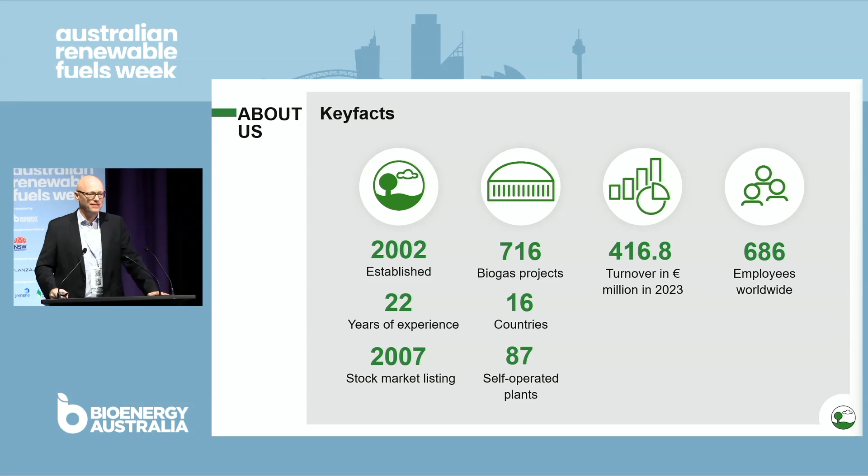We do EPC for biogas plants, for gas upgrading systems, as well as own and operate our own plants. As you can see, we've built about 700 plus biogas plants worldwide, of which we operate roughly 90 ourselves, mostly in Germany and Italy. And besides me, there is another 685 people working for EnviTec worldwide.

I first want to share a little bit, 3 examples of plants that we have built in Europe, just to give you an idea what's going on elsewhere, in case you don't already know. So this, for example, is a waste processing biogas plant, so actual organic residues from industrial sources in France, generating biomethane. For all of these plants, we have YouTube walkthroughs.

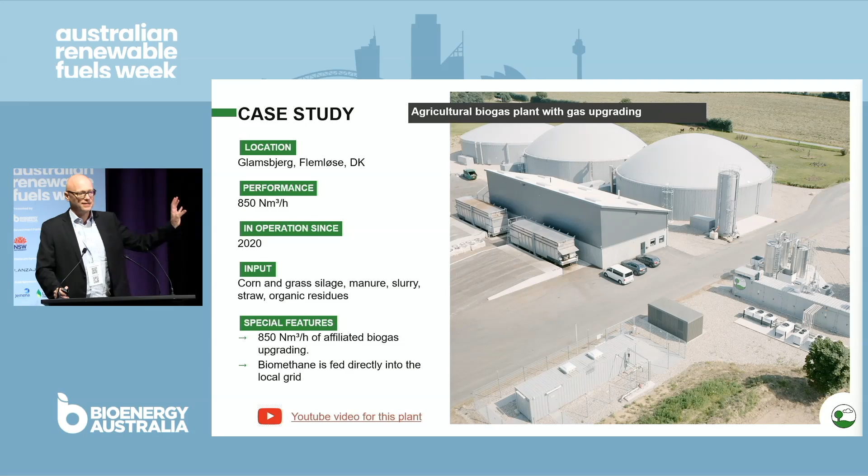Another one is an agricultural biogas plant, so that means we are using manure. I believe also some energy crop, probably grass silage, but mostly it's organic residues and manure processed in this plant, also feeding biomethane to the Danish grid.

And then we have our largest plant, which is in northeast Germany, generating about 25 tons of bio-LNG per day. So that is on-site liquefaction, not grid injection and then liquefaction elsewhere. We also liquefy the carbon dioxide coming from the separation on that site. And we generate the power required to operate the whole thing also from biogas on that site.

So obviously that's a pretty large biogas plant, but also it shows what scale is possible and happening elsewhere in the world. That LNG, by the way, is used as a long-distance trucking fuel in about 20 LNG filling stations that we also operate in Germany and France. So we control the whole supply chain from the biogas generation all the way to LNG distribution in this case.

In fact, also most of the input material in that case is chicken manure. Our major shareholder is Europe's largest egg producer, so even that is in-house, if you like.

Now, how to upscale biogas and biomethane. Like you said, the topic was for global demand, but it doesn't really matter to us where the gas is ultimately used. I think I discussed it a couple of times talking to policymakers. Yes, of course, everybody would appreciate domestic offtake.

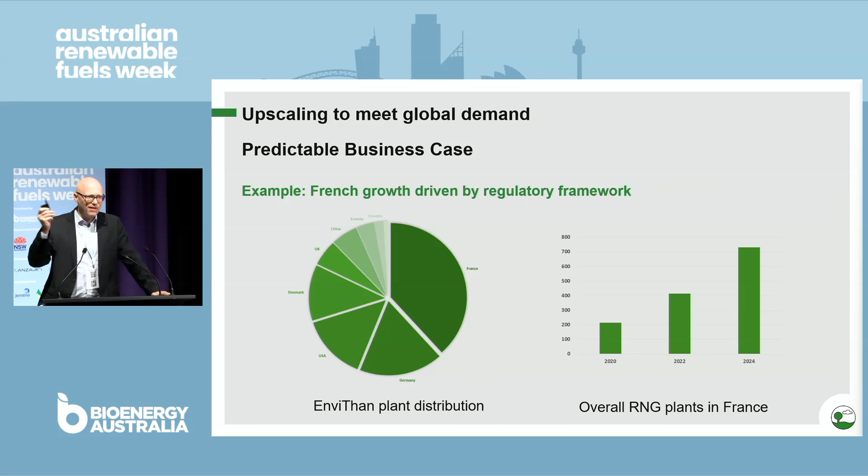And you can see on the right side the overall growth in the French market over the last 4 years, 2020 until 2024. You can see a steep curve. Now we are last year at about 700 plants. That's not us, that's overall market. And I heard 1,200 under development, somebody mentioned earlier. Why is that?

Well, there is a feed-in tariff for renewable biogas in France. The price is 30 euros. Well, I thought I'd come to an MMBTU country. I'm not, and I'm glad to hear that you actually use gigajoule, much appreciated, but that's about the same. 1 MMBTU is, I think, about 5% different from a gigajoule. So it's about 30 euros, not Australian dollars, per gigajoule in France. It doesn't have to be that much, but obviously the better the price, the faster the development.

Second, we get long-term contracts. So it's not a spot market where we have uncertainty about prices in the near or long future. There are clear national targets. In the case of France, it's 10% of renewable gas until 2030. So those are targets that are actually followed up on.

So it's not, as on the first day, I think there was talk about how we have targets for 2050, but not for next year. And that's always somebody else's problem if we talk about 2050. And simplified procedures, that was also raised. A predictable business case during the development phase and regarding the income, that's key. Like I say, it doesn't have to be 30 euros per gigajoule, but that's obviously nice and proven to help.

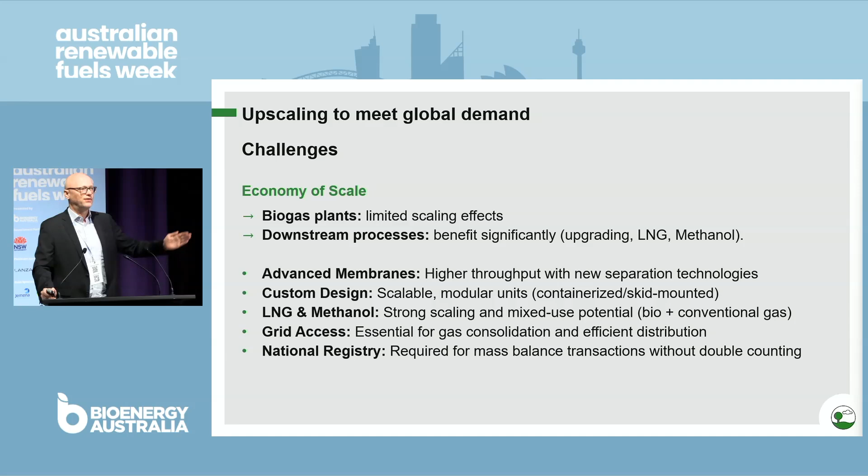So that's very encouraging and necessary for transporting or virtually transporting renewable properties of gas from one location to the other through the grid, or even from one grid section to a disconnected other grid section within the same country.

Here are two examples for economy of scale. I already showed you the bio-LNG and liquid CO2 plant that we have in northeast Germany. Another example is evolving in Malaysia right now. I'm mentioning it because it has been on the news. So a developer is planning a bio-LNG bunkering hub near Singapore, and that will be supplied by national gas pipeline throughout Peninsular Malaysia to provide renewable bunker LNG.

So that means not export LNG, but actual fuel LNG for ocean-going shipping. Mostly driven again by European regulations where we have emission targets on shipping that is going to or from the European Union. By the way, with a carbon price of about 100 euros per ton.

Now, gas market access. After upgrading the gas, we can transport it by truck using CNG, but that is only for a limited distance because of the relatively low energy density of bio-CNG, so at about 250 bar. Let's say until maybe 50, 100 kilometers, we can talk about that. But beyond that, we need other means. Grid access, already evolving in Australia.

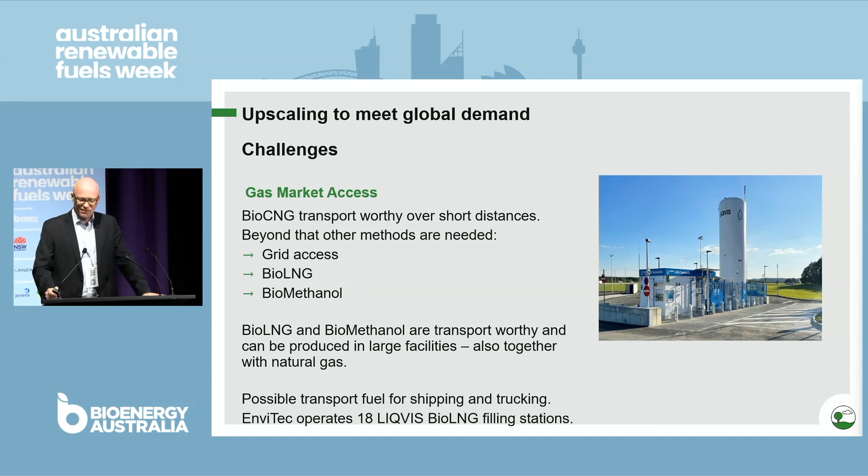Now about the diversified revenue streams. Of course, we have the biomethane, but beside that, every biogas upgrading plant is also producing almost an equivalent volume of CO2 at a very high purity. Somebody mentioned it's the cheapest way to capture CO2. I'm not an expert on that, but basically it should be true because the CO2 coming from our plants right now is free.

Most CO2 is actually vented, which is okay because it's carbon neutral CO2, so it's organic CO2 as well. But obviously it would be much better to use it and either produce carbon negative biomethane or abate CO2 in other fossil utilizations.

In the plant in Güstrow, that bio-LNG plant, for example, we produce food-grade liquid CO2, which is going to the beverage market. It could be used for power-to-X projects as a carbon source. It's basically freely available, highly concentrated, I think by default about 95+% CO2. Of course, that could be improved if needed, to whoever has a good case.

And it drives me nuts, frankly, when I see direct air capture CO2 projects. I wonder who is paying for that if nobody is even willing to take the CO2 we already have at a high quality at every biogas plant.

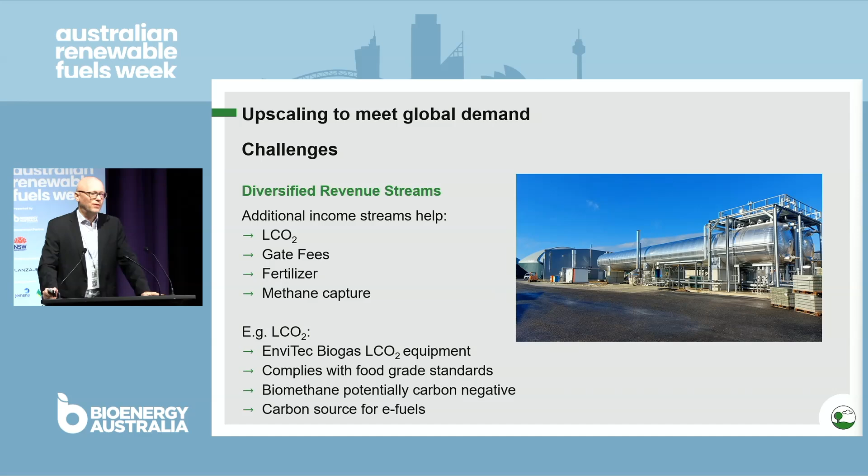Now, what can EnviTec contribute to accelerating the development here? So, of course, we have 20+ years of experience. We have built 700 plants. We are operating 90 biogas plants. And, of course, we are happy to share the experience that we have gathered there with anybody wanting to work with us on project development, on feasibility studies, and so on.

And also that's why I'm here and going to a lot of other conferences in the southeastern part of this world. Then obviously we can provide our proven upgrading and digestion technology, as well as provide customized solutions, for example, for large-scale or also very small-scale projects, for on-farm fuel production projects. So all of these things can be custom designed, and we would be a partner with experience of large-scale deployment globally. So we have built plants large-scale in France, in the United States, in China, and of course everywhere in Europe.

Now, what got us interested here? And that would be that Australia at least is a developed industrial nation, not so much in the biogas space, but in general. And that's helpful for us because that means that expectations in the quality, the efficiency, and the safety features of the product are in line with what we would want to deploy. We do have decarbonization targets in Australia, so that's helpful.

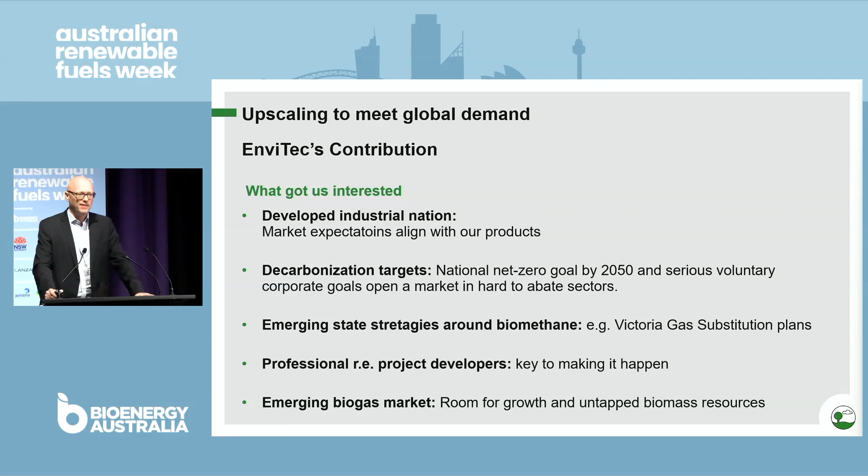We do see an emerging market here. So biogas obviously is not saturated. There's one biomethane plant in existence, so obviously there's a lot of space for new development, which we are happy to participate in. And we do see professional project development here. That's also not obvious and not the case in every market, and really key to fast deployment and development of the biogas industry here. Professional developers who know what they do, who know what the regulations are, and who can push for quick development. And that's perfectly on time.

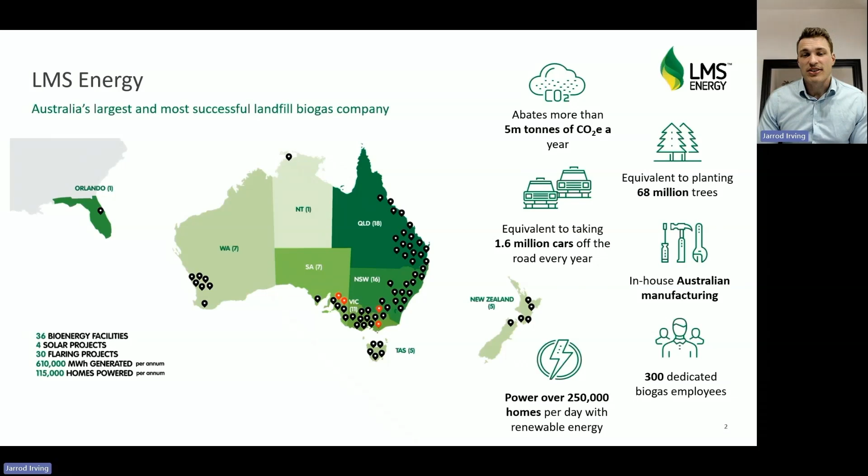We have over 36 bioenergy facilities across the country within Australia, New Zealand, and the US. We currently abate over 5 million tonnes of CO2 annually and power over 250,000 homes with renewable energy. And we see our role across the whole circular economy. So we produce electricity generation from landfill gas to electricity. We also flare. So all of our sites, we determine what's the best end use of our energy system, and some of that's putting it into the grid, some is for data centres, and others are just flaring because they just don't have enough gas.

So we also have Harman Energy, which is another arm of our business that also works with our agricultural partners in delivering solutions for different industries, meat processing, dairy, to really support behind-the-meter generation, but also working in sugarcane, looking at developing biogas to biomethane and other fuel sources. It's exciting to see where we're going as a business, and we see biomethane really playing a significant role to support our future work in this space as we continue to abate methane.

Now, I just want to give a bit of context on where the global market is. It is growing significantly at around 20% annually, with production reaching 9.5 billion cubic metres of biomethane. That is a significant volume of gas comparatively. It's over 370 petajoules. For perspective, we currently are producing 90 TJ, or 0.09 petajoules, thanks to the Malabar Biomethane Project. What I really want to know is how can we learn from international markets to fast-track our own industry?

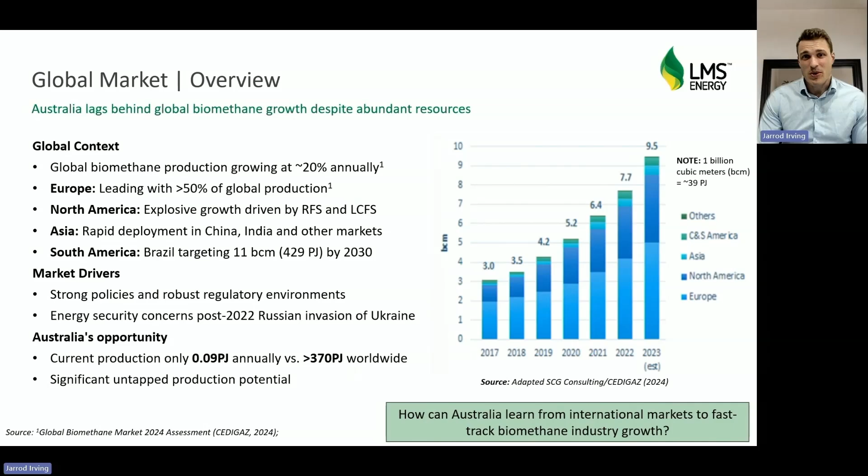This is a developed, entrenched industry worldwide. We need to be able to leverage that and maximise it to fast-track our developments. Now, I'm sure from today, and unfortunately I wasn't there, and yesterday, a lot of people are talking about what people internationally are doing.

And you have organisations like the European Biogas Association and the World Biogas Association that have really started to document best practice, as well as the Biomethane Industry Partnership, who've released fantastic information to help support the growth of the industry in those countries. And it's fantastic to see. And we can really work with those international partners, which we are at the moment, to fast-track our own sector. We don't want to make the same mistakes.

And what I've noticed in doing a project, in particular in the US, is there are hurdles. It is challenging, but the market in the US has created an opportunity. And although it is challenging at the moment from a political perspective, there are a lot of unknowns with the new government. Looking at the positives and how the US has sustained explosive growth, you're looking at the RFS, the Renewable Fuel Standard.

Now that provides, as of last week, around $28 US a gigajoule. Now you don't get that. Long-term offtakes are really important, and they're obviously not going to pay that amount. But those D3 RIN credits, which I'm sure James will speak on after me, are fantastic at supporting the project. So that market mechanism has been really important. You have the California Low Carbon Fuel Standard, providing an additional revenue stream if you go down that path for dairy in particular and other agricultural-based products.

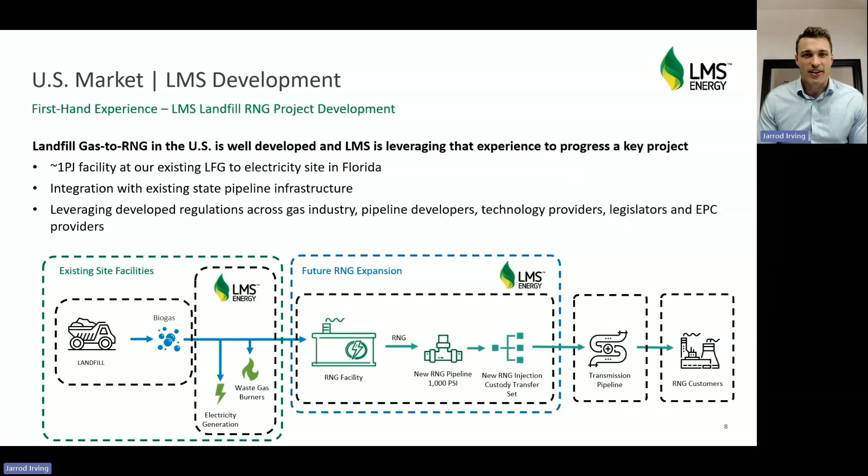We're talking to developers that have built 20 to 30 of these facilities. It is not new, and that's fantastic. It's really nice and refreshing. And I hope that one day we're in that same position, and hopefully not too far off. So there are some lessons learned as part of the work that we have been doing.

Commercially, long-term offtakes are so important. Being able to lower the risk profile with deals greater than 7 to 10 years is really important. It helps with financing. It helps provide confidence around where we're heading. You don't want to put investment into a project when you don't know where it will be in 10 years' time. Long-term offtakes provide surety to investors about the long-term profitability of those facilities.

Technically, the design is critical. Understanding your pre-treatment systems, your nitrogen removal units, your CO2 systems, how they integrate with each other and the different types of technology is really important, and also how well they're improving that existing technology. It's fantastic to see the development is only growing. Prioritising gas quality and facility uptime: the more you have the facility operating, the more biomethane or RNG you produce.

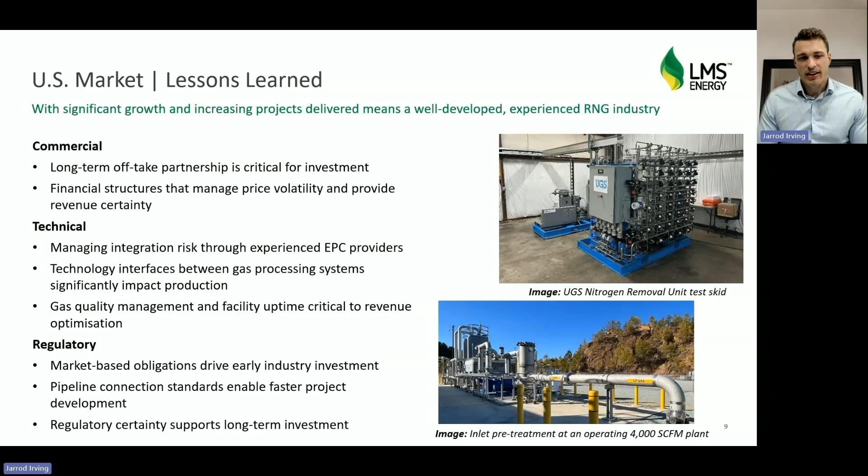Now, I'll just touch on Europe briefly. We have been doing a little bit of work in that sector and also have a few partners on a couple of projects.

But they've got such valuable information, and I find myself communicating with some of our European counterparts on just project experience and lessons learned. They've got over 50% of existing global biomethane production and have been doing that for the past almost 2 decades. And it's really led by France, Germany, Italy, Denmark, and the UK. But we're seeing significant growth continue across Europe, which is fantastic to see. And that's the key policy drivers around the ambitious RED II targets, feed-in tariffs, tax incentives, grid injection, price premiums.

Overall, the bioenergy industry, I've found internationally, is such a knowledge-sharing base. Everyone is so excited to get on the phone with you and have that conversation about how do you improve your facility, your anaerobic digestion process, which I think Europe do really, really well. And that's fantastic. And that's kind of one of those key lessons. So what we're seeing is, in particular for our ag projects, it's important to be able to gain that valuable experience on how do you manage those lessons learned.

So diversifying feedstocks and the importance. Scale matters. The larger the facilities, they do achieve better economics, but they also have their own challenges. Long-term offtake agreements with both feedstock and as well as your kind of offtake partners is really important. Also, potentially segregating your facility. So if you want to manage the feedstock as well as producing the biogas and potentially somebody else doing the upgrading process, kind of finding that balance, because there is a risk in each portion of that, and it's how you manage that.

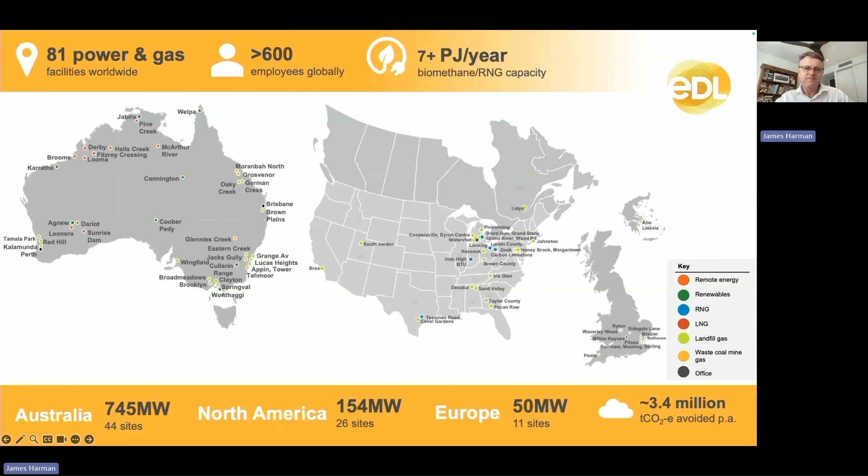In North America, we're now in the top 5 landfill gas to clean energy producers in the US. We have over 150 megawatts of renewable baseload power and produce about 15,000 MMBTU a day, or gigajoules a day, of renewable natural gas, which adds up to about 7 petajoules per year of renewable gas.

We entered the US in 1997 and Canada in the last few years, and through a series of acquisitions, we've established a base of 21 landfill gas to clean energy facilities, including 1 in Canada, and now 5 renewable gas plants, as you can see on the map here, spread across the US.

It started in 2020 in Indianapolis with our Indy High BTU RNG facility, and we've since worked with various waste companies to convert existing landfill gas sites to biomethane facilities, at Wood Road in Michigan, Tessman Road in Texas, and now 2 newer sites, and 2 of the largest renewable gas plants in the US, Limestone and Lorain, both in Ohio.

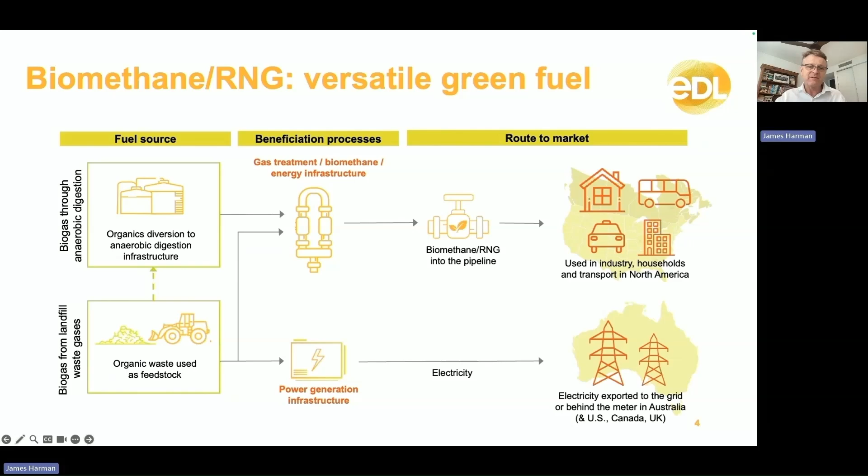A perfect example of how this works is in San Antonio, Texas, where biomethane produced at our Tessman facility fuels a fleet of 500 council buses for San Antonio Council, providing a great circular economy using waste gases to help fuel the council buses in San Antonio.

So how's this happened? It's happened on the back of supportive policies. It's an amazing achievement, largely due to market incentivisation through the right regulatory frameworks. These set clear long-term targets, provide flexible mechanisms so markets can grow without jeopardising supply or demand. And I'll start with the big one, the Renewable Fuel Standard, or the RFS, which is the basis for renewable identification numbers, or RINs. This is a marketplace where it's basically polluter pays.

Diesel refiners need to buy green credits to offset the carbon that comes from the diesel refining, and companies like EDL and others in our sector produce these RINs through producing renewable natural gas, and the polluter buys these green credits from us to offset their carbon emissions. And they purchase the RINs and then they retire them to meet their carbon reduction obligations.

And in terms of value, well, it costs a lot more to produce renewable gas than it does to produce natural gas. And so these credits need to have some material value to incentivise the production of green gas or renewable natural gas. But as an example, right now, the value of a RIN in the US is about $38 a gigajoule versus natural gas at about $2.50 a gigajoule. So that shows the differentiation in terms of the value of the product in the market.

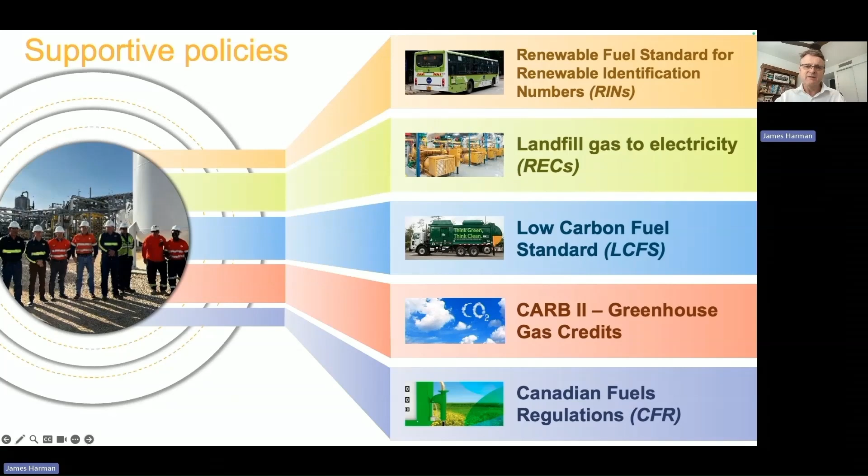One that's not on this page, but it really has been a game changer for renewable natural gas particularly, and has seen an incredible boom in the construction and operation of renewable gas plants across the US, is the Inflation Reduction Act introduced by the Biden administration. The Inflation Reduction Act has allowed developers of RNG plants in certain periods of time to claim income tax credits against the capital cost of developing these projects. And that's helped fuel the boom really in construction in recent years, and EDL has benefited to a small degree from that as well.

So current annual production of RNG is about 120 million MMBTU, or close to 120 million gigajoules, with demand just below that level. So, as I said, the renewable transport market is becoming saturated, but that's really led to the emergence of another market that's thriving right now, and that's the voluntary market, where large corporates want to purchase renewable gas for hard to electrify industrial processes, or for their own carbon footprint, for large corporates who consume gas even in heating buildings, heating offices, certainly key in industrial processes as well. These companies who want to offset their emissions have the option to voluntarily purchase renewable natural gas, and it can be certified as validly renewable.

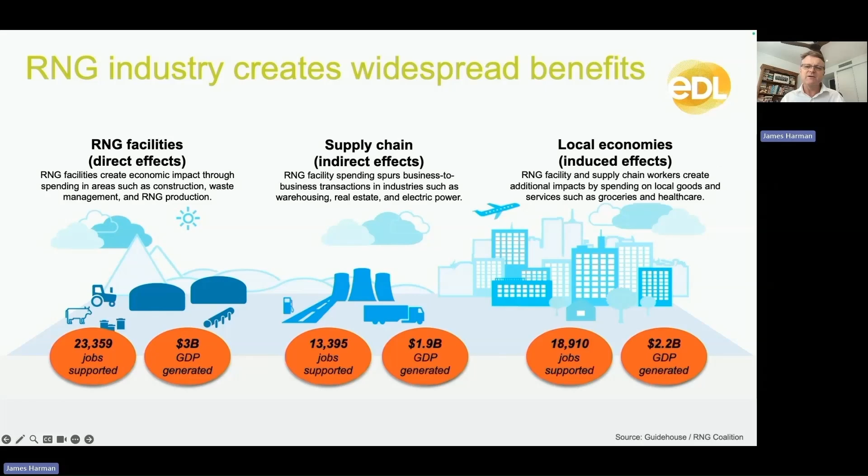So in conclusion, the US RNG biomethane industry has been a major success story, and there are so many lessons here for Australia that we can borrow from without having to reinvent the wheel. We have the feedstock, we have the demand. In fact, our domestic gas market's crying out for more supply. What we're missing is a supportive regulatory framework to underpin investment in renewable gas and market creation activities. At a minimum, we need a renewable gas target similar to the existing renewable energy target, the RET, that's been so successful in Australia, and the low carbon fuel standards in the US.

It'd be a great solid starting point where the polluter pays. A renewable gas target would work with fossil fuel gas companies needing to produce a certain fraction of their production as renewable gas, and if they're not able to produce it themselves, then they can buy credits from those who are able to produce it to offset some of the carbon of the fossil fuel gas that they produce.

I'm going to leave it there. There are so many lessons that could be learned, and I could talk about this for a long, long time, but this is a very short presentation. The key message, I guess, is that this industry will only thrive in Australia with supportive regulatory framework and policies. That's been seen in the US, it's been seen in Europe as well, where we operate.

But our experience in the US is that if you get the policies in place, you get the right framework in place, then the market will follow and can lead to a buoyant and thriving industry such as we participate in in the US. I look forward to continuing to support the development of that industry in Australia and hope to be able to come back and talk about the exciting projects that are being built in Australia to produce renewable gas to help decarbonise many sectors across Australia, including industry, transport and others.

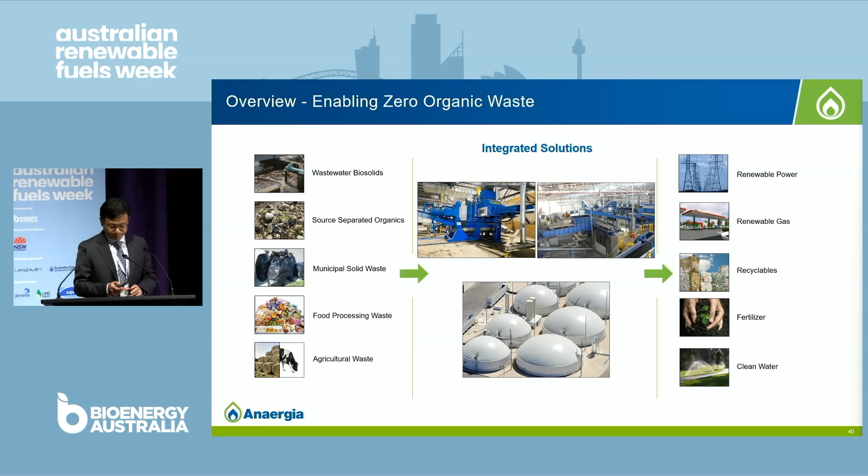As a group, with all the technologies we have, we start from the waste receiving, pre-treatment, very important, and go into anaerobic digestion and processing of the gas, either into power or into renewable gas. We also have a growth technology that handles the digestate treatment. Now overall as a group, we have completed more than 1,700 either plants or subsystems. So a lot of track records and knowledge and experience. We have global operations, so in Italy, UK, and Asia. I'm from Singapore. And we also have operations in USA and Canada.

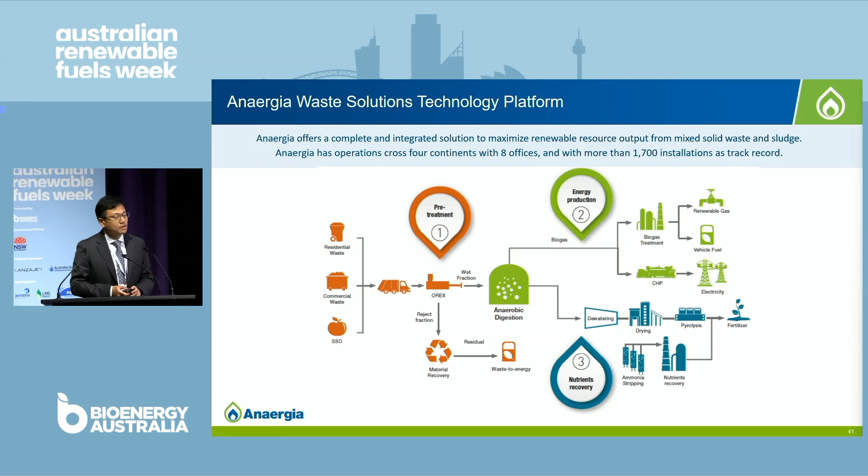Our fundamental business model, basically we supply the technology package to our customer. It will typically include the engineering design, process guarantee, and the key equipment we need for the project. Upon request, we also provide service on O&M, and on a case-by-case basis, we may own, invest, and operate a biogas asset. It could be greenfield or brownfield.

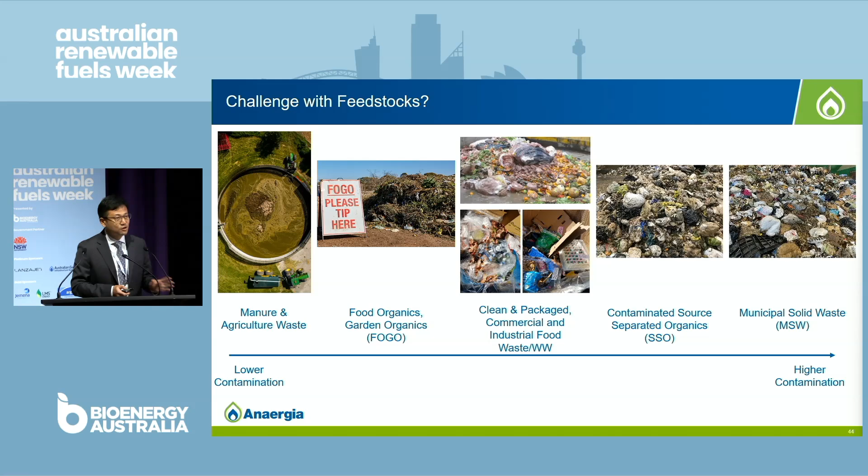Now, of the two solutions we have, the first one is about pretreatment, which is related to feedstock. I think this is very important. I think many people have emphasized it. For a biogas power plant, you can have many different types of possible feedstocks. It will range from very clean material to very challenging material such as MSW. If your plant is able to accept different kinds of waste and your pretreatment system is versatile enough to handle all of them, you will expand your feedstock supply base.

So in this case, we have this technology called organic extrusion press. It's a high-pressure extrusion-based technology. What it does is that it can accept what we call polluted waste, with a lot of contamination, even material like MSW. And after the process, we will have one wet fraction, and that's what we are targeting. That's the material for the AD plant. And the reject fraction, which is the dry fraction. Now, one additional piece of information for the Australian market is FOGO. This equipment is also suitable for processing FOGO.

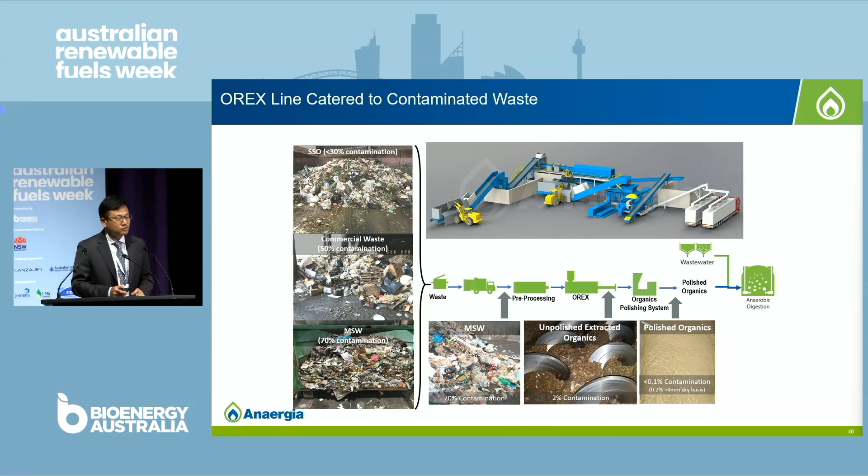So you accept the waste in your AD plant and you treat it. This technology also enables another possibility, that you set up an off-site organic recovery facility. You accept the waste locally, you recover the organics, and you bring the organic material to a centralized AD plant. So we have additional feedstock on top of the waste that you're receiving in your AD plant. You also achieve another objective by doing so, that you divert the organics from landfill. So if you have a landfill tax or you want to reduce emissions from landfill, this is another additional benefit.

Just on the FOGO topic, on the left-hand side, the picture is about the mixture of food waste and the garden waste. After the OREX processing, what you get: in the center is the organic fraction, and the dry fraction on the right-hand side.

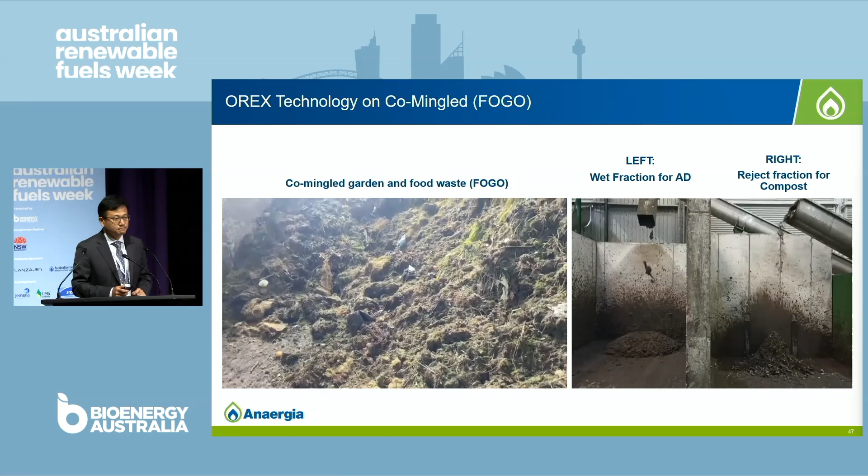Now, if we talk about the quality of biofertilizer, then we need to control the quality of the organic in the digester. We have this technology called polishing system. This step removes all the small flakes of plastics. Another step removes all the grit and sands, including glass particles, from the organic.

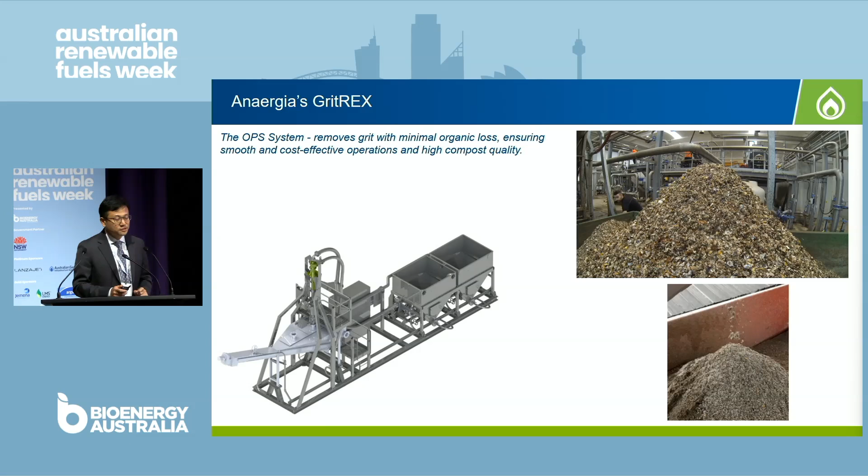So after this two-step polishing, you will get a very good organic fraction into the digester, guarantee smooth operation of your digester, and you will get a very good quality of organic cake out of the digester for further use as fertilizer. So this first solution makes more feedstock available for the AD plant.

Second solution: how can we make more biogas out of the existing digester? A solution we call Omnivore. It's enabled by using a high solid content digestion technology. Just a simple chart, I use a wastewater treatment plant digester as an example.

When you increase the solid content of your digester, the same digester will be able to take in more waste and generate more biogas. And that allows you to take in additional organic waste from, for example, the off-site organic recovery facility I showed just now.

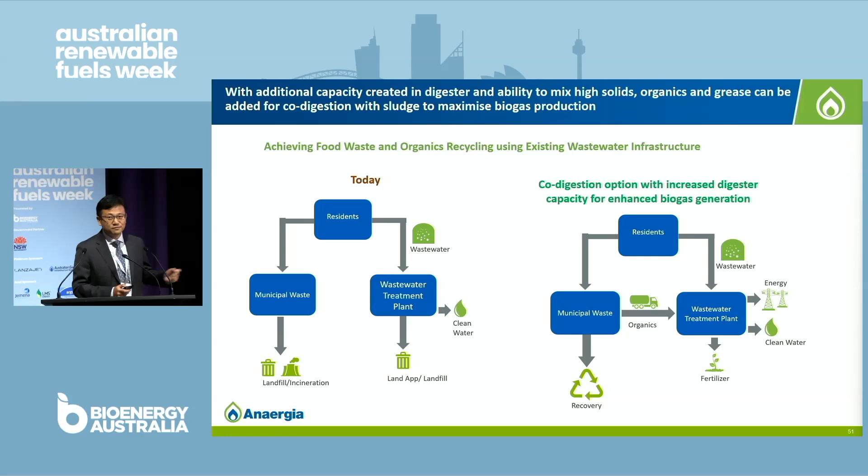A lot of benefits of doing so: additional capacity out of your existing plant, and you don't build additional digesters, so lower capex; less volume of material to handle, to mix, to pump, to heat, so operation costs will be lower. Additional income for waste coming into your facility, gate fee, more power, more biogas.

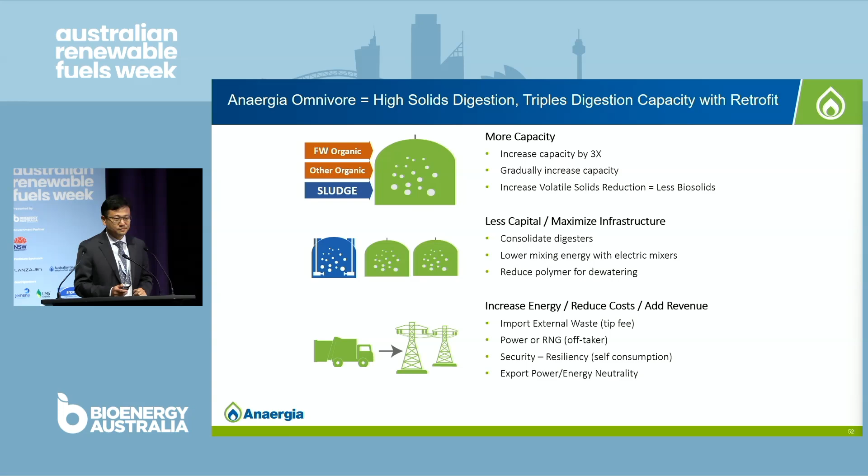There's a group of technologies that enable this solution, and one of the key technologies is this mixing technology called a PSM mixer. It's a submersible mixer and slow speed, so it has very high torque, and it can handle material with very high solid content, viscous material. It's installed on a guide pole, so we can adjust the height of the mixer at different stages of operation. It also comes with a service box on the top.

What it allows you to do is to carry out all the maintenance and repair work of the mixer while your digester is still operating, generating biogas continuously. It's a very energy efficient mixing technology also.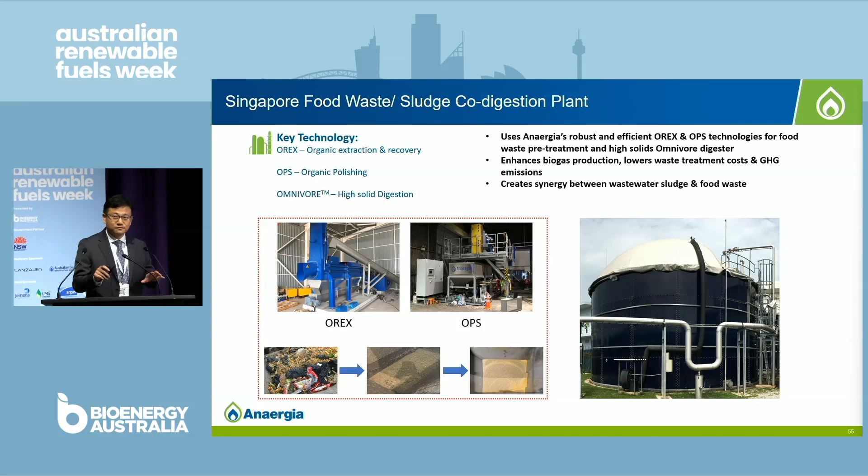Now I just want to show some interesting case study pictures. This is a plant we have in Singapore that has installation of the OREX and the polishing system, and also co-digestion, with the best and maximum biogas generation. Actually, co-digestion also benefits economically in terms of the material that you use.

This is another plant we did in Italy. You can see the 4 digesters there. We did a retrofitting for one of the digesters. Now this digester is able to handle the material that used to be handled by 3 of the digesters. So you can see the other 2 digesters right now are empty. And the benefit for the owner is lower capex cost and lower operation cost.

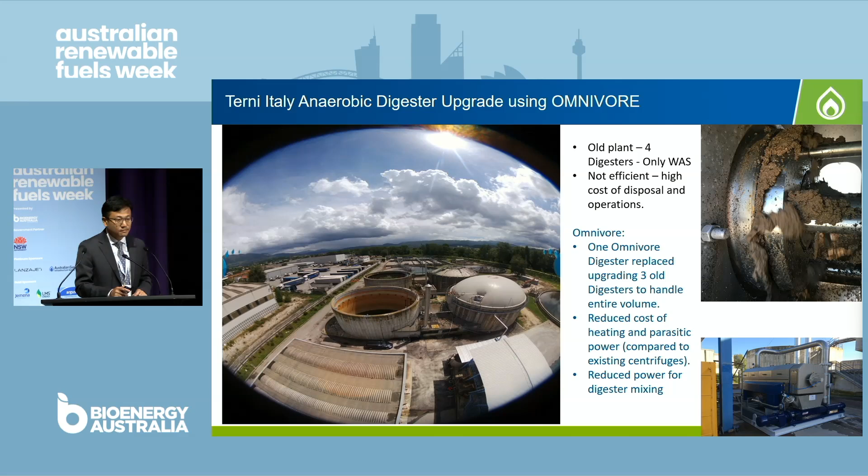There's another project reference we have, but I want to show this one. It's interesting. This is a SoCal biomethane plant that we own and operate. What you can see here is that at the center, there are 2 existing digesters. We did the retrofitting and technology upgrading. And now, the facility is allowed to take in additional organic waste from external sources.

So we can see the facility at number 1. That's the one we installed for taking additional organic by truck. We also installed the biogas upgrading system that's on the right-hand side. So this is able to produce about 320,000 MMBTU per year.

I don't have a picture here, but by doing all this off-site organic recovery and centralized AD, we are also operating one of the biggest biomethane facilities in California and the USA. It takes about 700 tons per day of organic material and produces 1 million MMBTU per year.

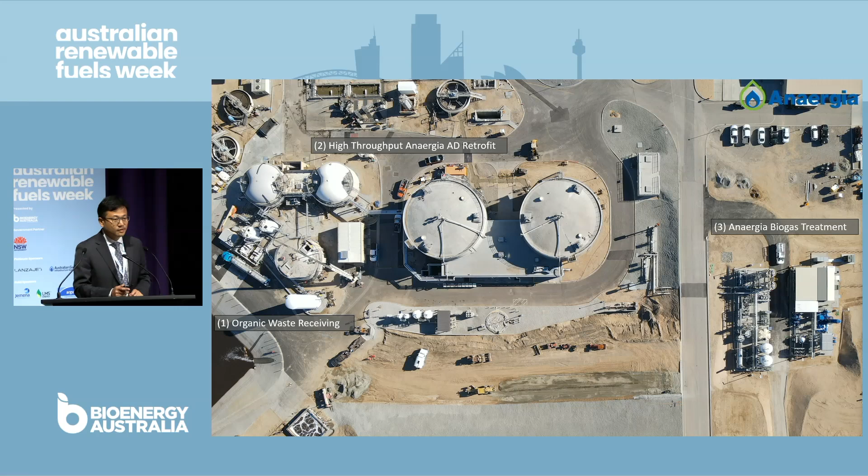Yep, so 2 solutions. One is to maximize the feedstock, and second is to maximize the production capacity of the existing digester. That's the key message for me today.

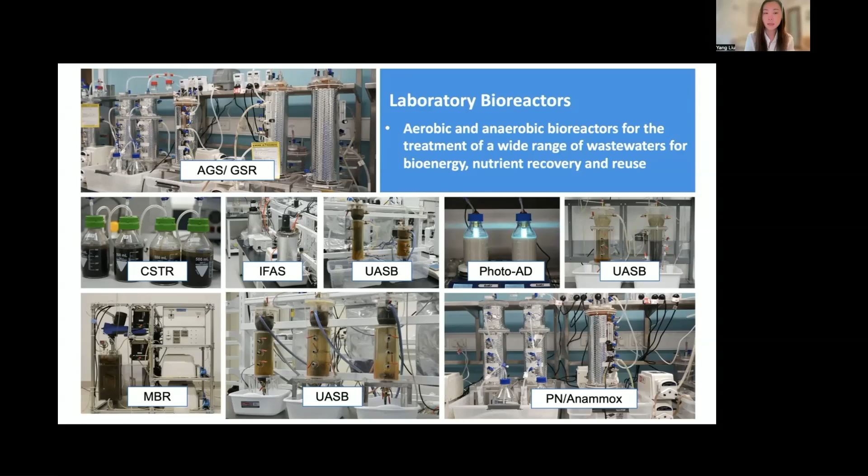So my work is mainly around the development and optimization of aerobic and anaerobic bioreactor systems for waste and wastewater treatment, biogas and nutrient recovery, water reuse, and biogas purification. So in my lab, we often operate multiple bioreactors in parallel, each with different design and operation conditions to refine and optimize the treatment efficiency.

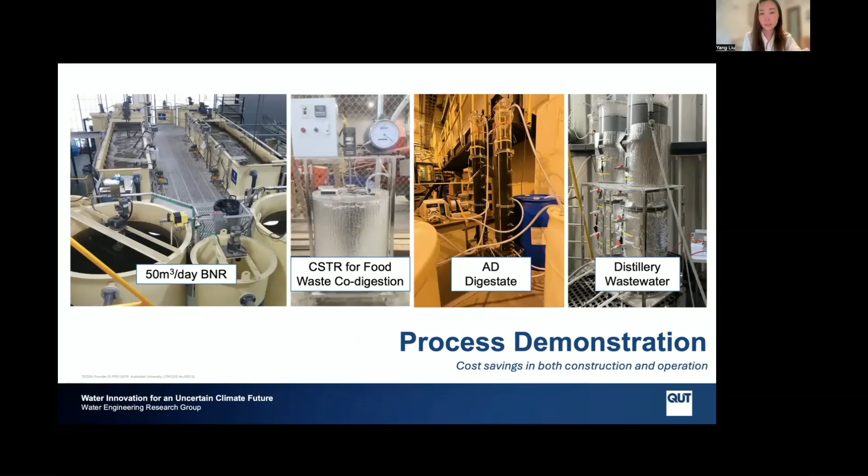And we conduct lots of molecular biology work, try to link engineering design and microbial ecology, and consider how we can optimize the engineering design and control for the selection of more active microorganisms in the bioreactors. Some of the work or technology we've developed has already been successfully demonstrated at a large scale.

So the project I would like to introduce today is around the ammonia removal from the landfill leachate, especially for the landfill with leachate recirculation. Landfill leachate recirculation is actually a very commonly used approach to maintain moisture level and to improve waste degradation. However, when we recirculate landfill leachate, we also concentrate the ammonia in the landfill, and that will eventually

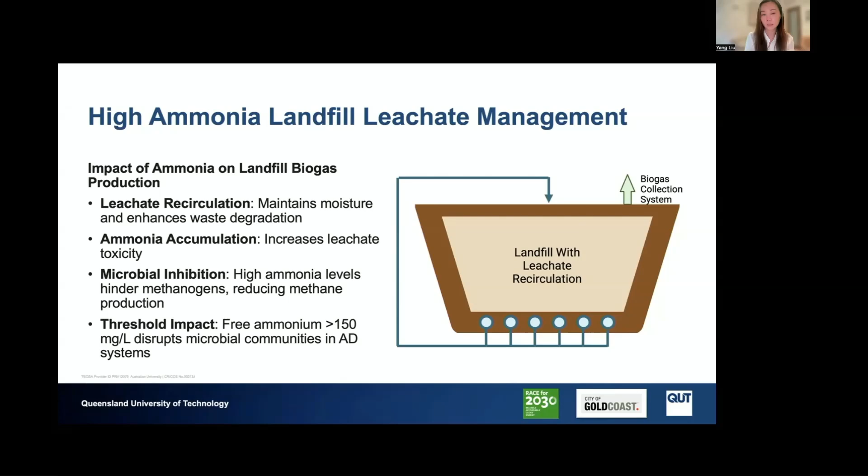inhibit methanogen activities. So in this project, we will assess the feasibility of applying the granular sludge reactor technology, we call it GSR, for high ammonia landfill leachate wastewater treatment. The GSR process is a one-step biological treatment process that was actually developed by my own research group. This technology is ideal for high ammonia wastewater treatment.

What you can see here is that under all conditions, we can achieve over 99% ammonia removal. And for some of the reactors, we've already operated them for over 3 years, and we observed very stable operation performance. We also want to point out that we're using very low hydraulic retention time here. The hydraulic retention time ranged from 5 to 8 hours, and the influent ammonia concentration ranged from around 200, 300 milligram per liter to over 1,000 milligram per liter.

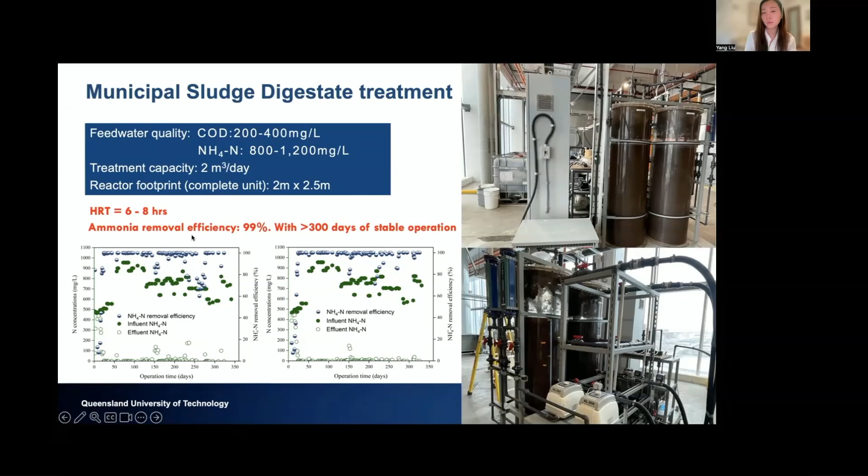And if we look at the footprint, it's actually a very compact system, including the control panel here, as well as all the pumps and other control systems. The total complete footprint is only 2 meter by 2.5 meter. We operated the reactors with an HRT of 6 to 8 hours under room temperature conditions of about 20 degrees, and we were able to achieve quite stable ammonia removal efficiency.

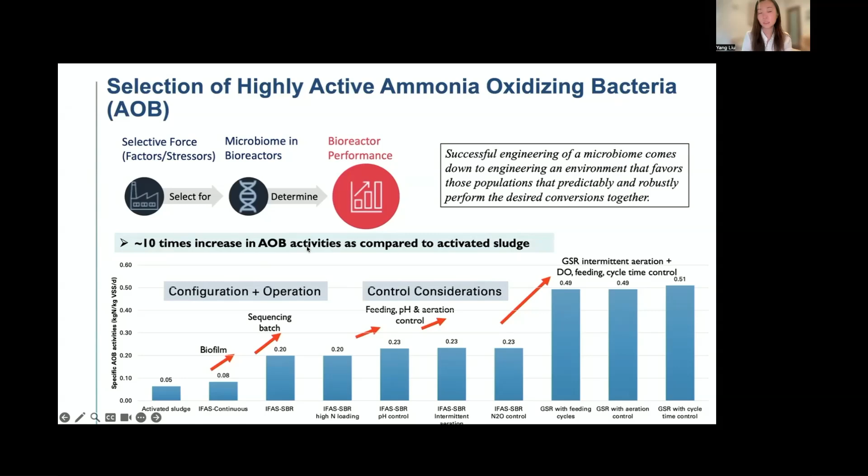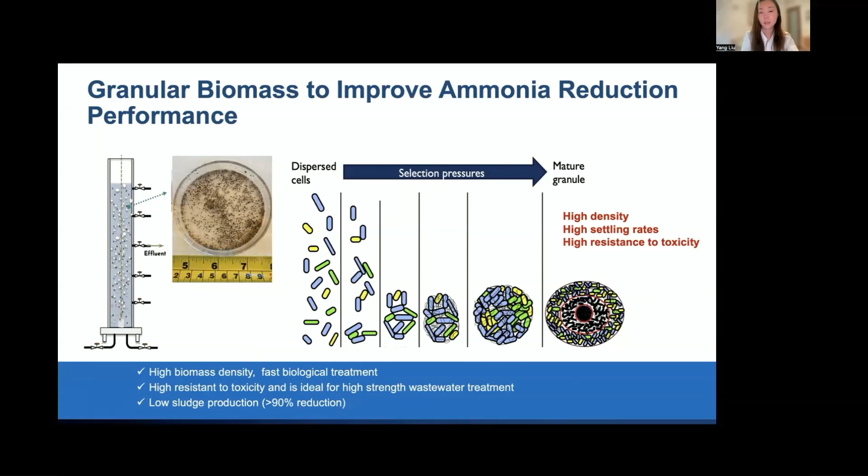And then if we start to control this oxygen concentration and the feeding strategy, then we can achieve this extremely high ammonia oxidizing bacterial activity that is 10 times higher as compared to the activated sludge activity. And in addition to the selection of highly active microorganisms, we also used engineering selection pressure to select or enrich the granular sludge. And the granular sludge, similar to the anaerobic granular sludge, can settle very fast. They have very high density and they're highly resistant towards toxicity. And therefore, they're ideal for high-strength wastewater treatment.

So this particular wastewater that we are treating now is the landfill leachate that has extremely high ammonia concentration. So what you can see is that the average ammonia concentration is above 3,000 milligrams per liter. We also have very high COD concentration. And therefore, when we started the reactor operation a few months ago, we thought we'd just operate additional reactors to deal with this extremely high free ammonia concentration and high COD conditions. So we operated 3 reactors.

The first reactor was operated with the traditional GSR operation, how we would operate this type of system previously. And then the R2 reactor was operated with the control of C/N ratio. Essentially, we adjust the feeding strategy based on the COD concentration inside the reactor, and we allow the COD to degrade through denitrification before we add additional leachate into the bioreactor. And the third reactor was operated with free ammonia level control inside the reactor in order to optimize the treatment performance.

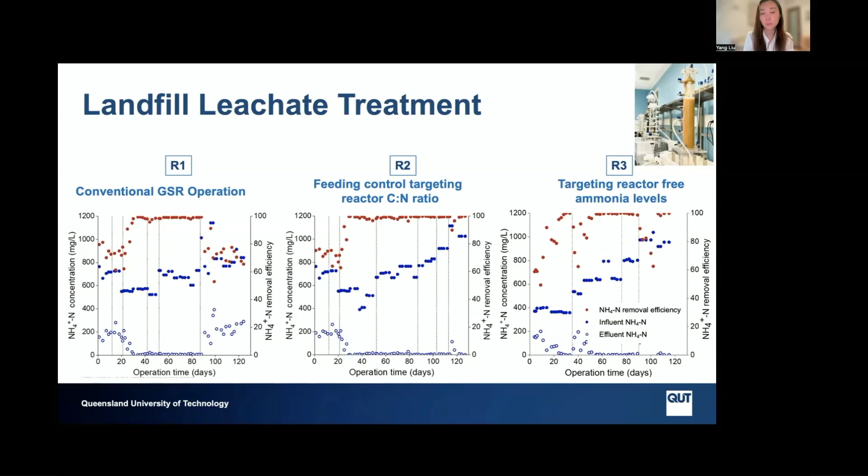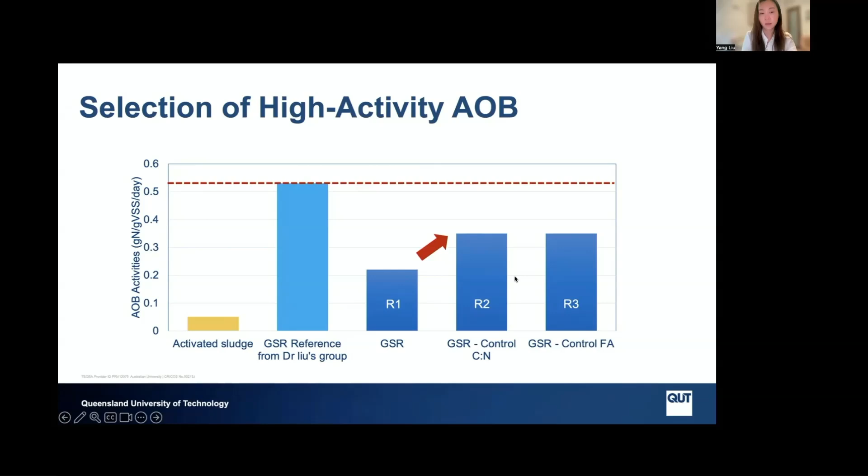So from the performance data, we can see that R2 and R3 can completely remove ammonia from the landfill leachate wastewater, but we are still in the process of optimizing the reactor operation. So if we take a look at the AOB activities from these reactors, the light blue bar represents ammonia oxidizing bacteria activity observed in our previous study. Although we haven't yet achieved the optimized AOB activity level, what you can see is that with the optimization, R2 and R3 are able to support the selection and enrichment of highly active AOB.

Based on all this, I would like to summarize. Effective management of digestate is crucial for the optimization of nutrient recovery and ensuring environmental compliance for sustainable waste management. Based on our laboratory study, our GSR has demonstrated a strong potential for reducing ammonia concentration from the high-strength landfill leachate with internal recirculation. And our aim is to complete the laboratory study this year and to set up pilot systems in 2026, next year, and we'll start the pilot testing and optimization.

The last point I want to make is that the composition of digestate can really vary depending on the feedstock and the digestion conditions, and therefore in terms of digestate management strategy development, it's very important to look into the other characteristics, and if needed, testing and optimization are often needed.

And I'd like to take you through our journey of energising organics, and our journey of accelerating Australia's renewable gas generation. So, NALG quickly. Organics is our energy. Innovating the organics processing space is our business. Delivering sustainable solutions in the organics processing area is our mission. And I'll cover more of this later in the presentation. But making biogas happen, we heard it from Charlotte, and we want to pick up the gauntlet of actually delivering those biogas projects to Australia.

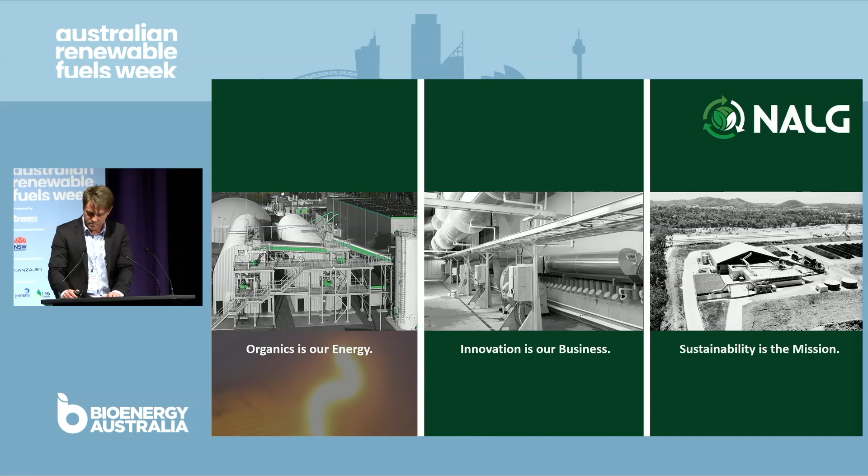So, our technologies, capabilities and partnerships. NALG brings together a unique combination of technologies, offering an industry-leading circular hybrid processing model. NALG started out in aerated floor and in-vessel composting systems, often known as IVCs. These systems are scalable, modular, and can accommodate small and large project requirements. In future years, NALG has a partnership with Kanadevia Inova, formerly known as Hitachi Zosen Inova, bringing their full suite of technology that they offer, of which wet and dry anaerobic digestion.

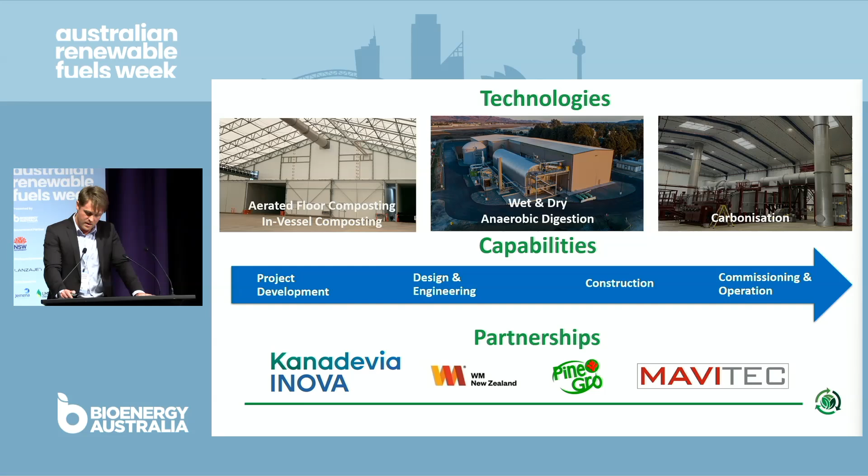These are full package systems. They include all associated gas conditioning, upgrading and processing. These are tailored to best suit sites and the unique opportunities that they offer. To complete that loop is our carbonisation systems. These utilise a gasification process, outputting a high-quality biochar. Now, our capabilities go beyond technology supply. We are actively involved in project development, design and engineering, construction, commissioning and operations. We've strategically partnered with these businesses below and others to make possible the facilities that we're now offering.

Now, issues with these is some of the recycling rates can be quite poor. We have contaminated oversize and legacy organics, which actually end up in landfills. They're net energy consumers, GHG emitters, affected by weather, and have a limited amount of food waste or types of food waste that they can accept. Now, we're losing huge value in the organics actually processed in this way.

So, enter NALG's hybrid processing solution. So, we take a typical IVC system that we know. This is all associated process control, air handling and odour capture systems. We now add typically a dry AD system, giving us the process now of taking a wider range of organic materials and unlocking the valuable biogas generation for sites.

With this biogas, we have a range of options available to the site. We have the opportunity of using a CHP or taking the gas away and upgrading to biomethane or CO2. A typical footprint on site, taking away the parasitic load, we are still net exporters.

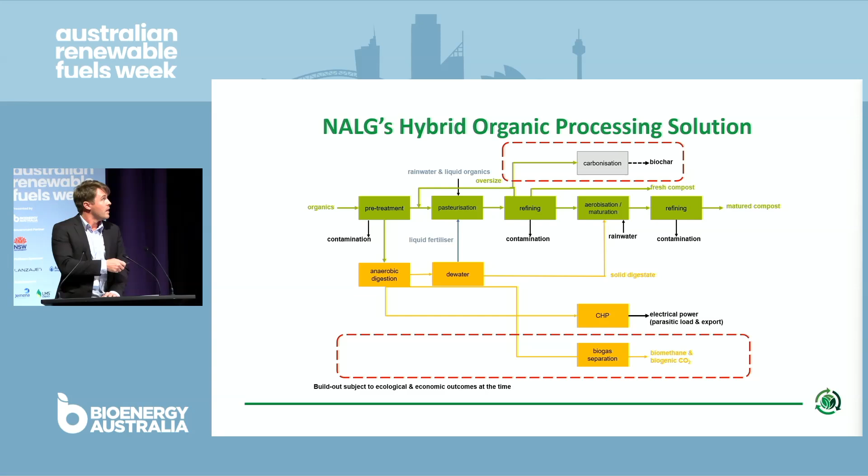And now, just touched on before from our friends in Anaergia, facilities need versatility to be able to process a wide range of feedstocks. As an operator, having worked at facilities, this can change quite often. So when we're looking at an organics processing site, we see a dry AD system as the most advantageous. So a dry AD, as the name would suggest, digests material with high solids content without the need for significant liquid dilution. This provides the versatility to digest a diverse range of feedstocks, as we've shown up there before.

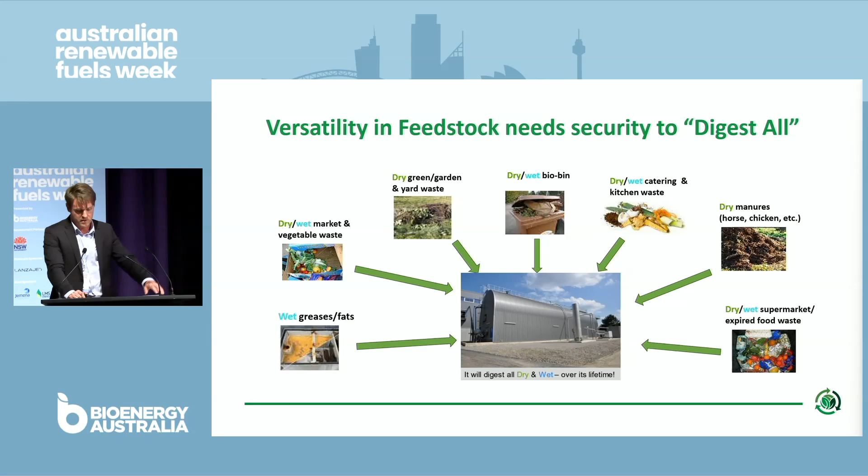That would be fantastic. And with these projects, we offer various delivery models, so EPC, or in a recent project that we're in the development stage for in the Mid-Coast region, a build, own and operate. Just basically showcasing our commitment to investing in our technology and backing it.

These hybrid facilities have modular processing capacity, so sky's the limit, really, in terms of how much we could process on a site. So 2030 is fast approaching with FOGO mandates, and developing infrastructure for regions is going to be critical to meet these mandates.

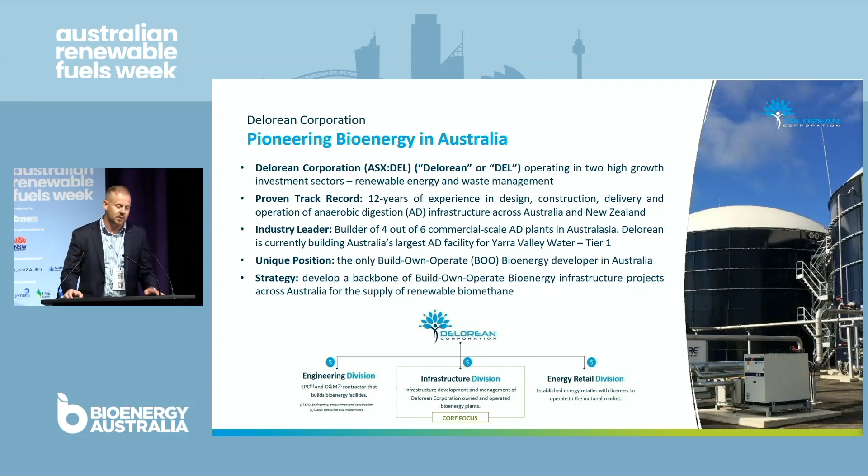So across the journey, again with the commercial lens, we've designed, built and moved into operation multiple facilities, award-winning facilities that have really focused on how we convert organics and the different types of organics. We spoke a lot about agricultural residues, where that fits in the Australian context currently, in addition to commercial industrial organic waste, where we are predominantly focused, and then into that sort of municipal waste and that diversion of food organics, green organics, FOGO, from landfill.

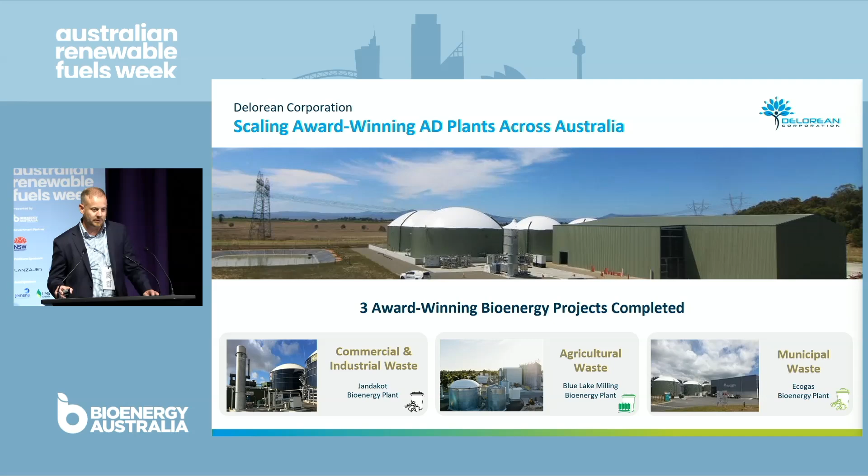So as we look at the opportunity, and the circular economy of utilising a resource or changing the name of waste into a resource, there's over 40 million tonnes of organic waste in the Australian sector. 12 million tonnes of that is currently going to landfill. There's a national policy to halve the amount of organics going to landfill. We really need to stop organics going to landfill. It's not in the circular economy. The circular economy is to utilise.

So as we look at this bottom graphic, we can see that we're processing organic waste through a well-mature technology. We're not a tech play. We're here around a commercial lens. We develop facilities to give a commercial return to support investment into this sector. Our focus previously has been in the generation of electricity, mainly because the offset of energy behind the meter has got the highest commercial value. But we're seeing a strong push, and the projects and case studies that we'll talk about shortly will highlight our transition more into the green gas sector, where we not just see higher efficiencies, but better returns from being able to capture the biogenic CO2 side as well.

So across our portfolio, we're heavily focused on pulling all of the levers to support the investment into this sector to really drive this sector forward. And we feel that we're starting to create a bit of an inflection point within the market when we talk about our pipeline. So obviously from waste, harness the energy, capture that in a green gas, generate the biogenic CO2, but also output a biofertiliser that is really key to that circular economy of driving waste from landfill, but also into energy.

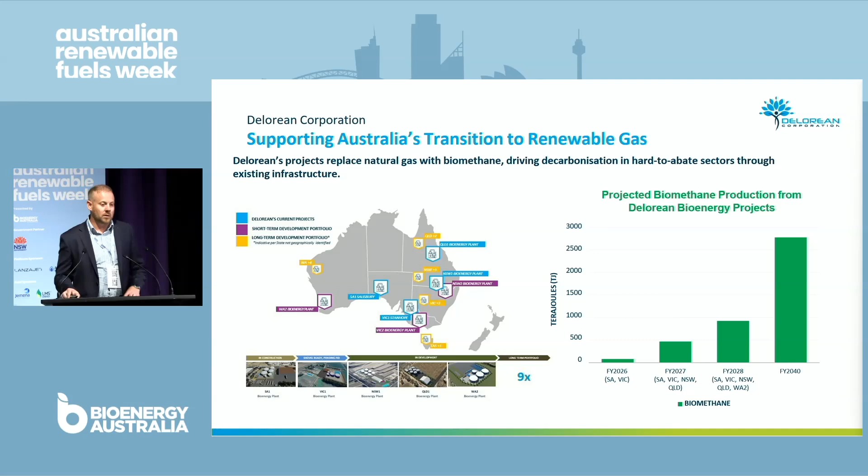So, we've got an announcement that was released today, and I'd just like to thank our partners with ARENA. We secured a $6.1 million grant towards our South Australian One project. So, yeah, that's been a long journey. I think we've all put the work in, and I think the saying is there's no such thing as a free lunch, but we're getting there.

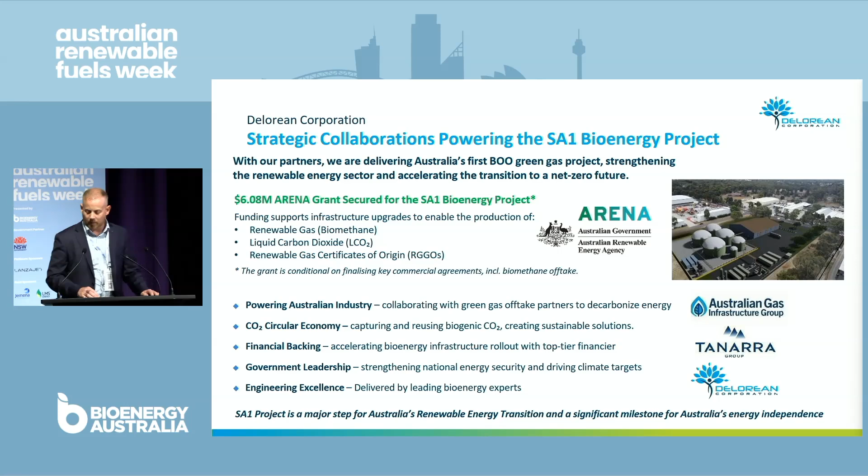Also, AGIG, they've supported us along the way with the South Australian project, and I believe this is going to be the first gas or biomethane project outside of the hydrogen projects that they're doing into AGIG's network. So, again, a great achievement. This project is in build, and I'll talk about the timeline shortly. We secured finance through our partners at Tanarra, and we are into that construction phase. And we're a long way down the path with the offtakes, both from a biogenic CO2 and also from a biomethane upgrade perspective.

So this facility in South Australia is in a place called Edinburgh Parks. It's about 15 k's out of the city. It's in a light industrial park. It's able to process organic waste with neighbours on all 4 sides.

It's taken a little bit of time to get through the approval, but also reach FID, but we have broken ground. We also expect to be generating first gas by this time next year. So that is well underway. Long lead items have been ordered. It will generate about 200 TJs per annum, so 200,000 gigajoules. We will be outputting just over 180 once we offset the parasitic load on site through the biogas generation. It's a 70,000 tonne facility.

I think Lee highlighted a 12 petajoule offtake. 12 petajoules, just in the scheme of things, is well over millions of tonnes, and I think we have to bring ourselves back to the point of how big facilities are. I think Thomas had a slide up of a 150,000 tonne facility that was very large. So this is a 22,000 square metre site, and our focus is deploying this through to first gas, generating biogenic CO2 and methane into AGIG's grid in South Australia.

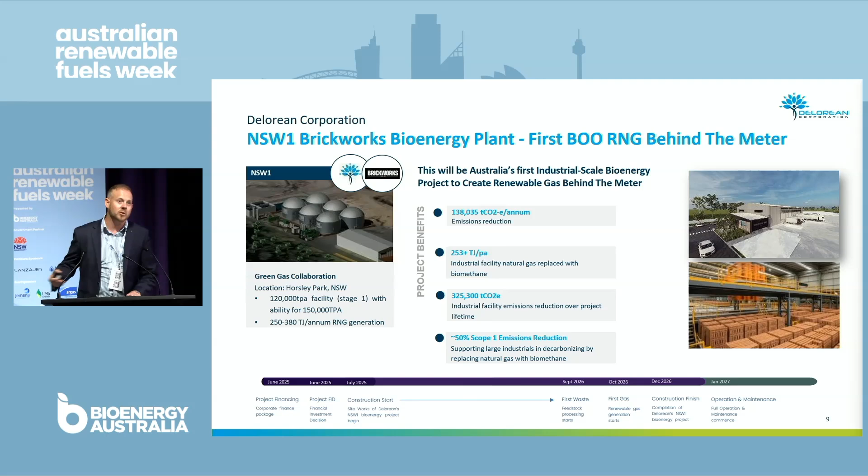Again, that's been a costly, timely process, and it'd be great to get all of the agencies and policymakers on the same page, so that we can achieve this type of infrastructure that aligns to the decarbonisation pathway of the hard-to-abate sectors as well. So what does it mean? Well, collaboration is key. When we look at all of our projects, from offtakes to lining up all of the levers to enable a commercial return, is where we're heavily focused. So getting government, local communities, the industrial sector through to investors and suppliers all on the same page is where the projects need to start.

And then successfully delivered all the way through, because we can't afford, as Charlotte again said, a failure in this nascent market that we've been pioneering for some time. So we're on a mission. We're heavily focused on transforming Australia's waste landscape. We recognise that there's energy challenges ahead, and also we see this as the greatest opportunity that Australia has. And I'll leave it there.

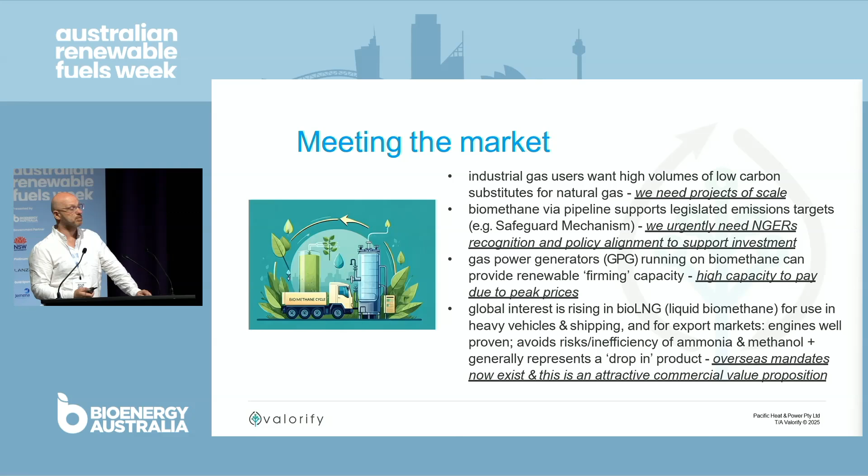And then we see global interest rising in bioLNG, and we've heard a lot of talk on that already, so I won't recap that, but particularly in the shipping sector through bunkering, which we think is a really exciting market, and a lot of demand in offshore markets for bioLNG, where those transport applications are very well established.

So if I look at the revenue stack, the bankability of all your revenue streams in a biogas plant is very important. But the sad reality today, where we sit, is that domestic buyers in Australia, and Lee touched a little bit on this in his presentation earlier today, are just unable to pay what Asian and EU type consumers will pay for the product.

Has anybody seen that Argus Media publication that's on the desk out the front there? The price for German biomethane in the market ranges from 90 to 120 euros per megawatt hour. So we're talking 40s to the low 50s Aussie dollars per gigajoule for the product. And that's just a fact. It's a market reality. We can't avoid it.

So the challenge is, in those markets, of course, there's also incentives and support, and there's some fairly eye-watering numbers talking about the value of the abatement even in those markets over and above the actual methane molecule itself. So there's a lot of things to think about in how you monetise and bank the revenue streams in a project. Biomethane yield is also really important.

Lee also touched on this morning that Australia is a very high-cost labour market. So automation and high yield is really critical to overcome some of the challenges of operational costs. So biogenic CO2, great opportunity, but it can be as much as 50% of the volume in your biogas stream. What are we going to do with it, right?

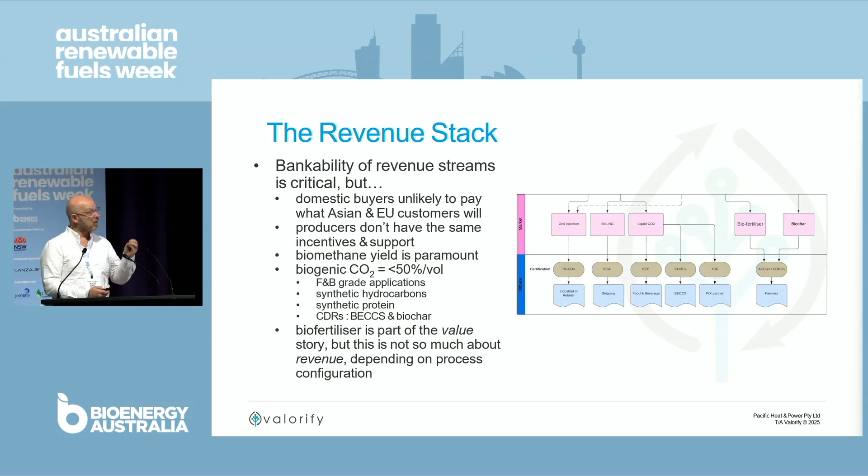Biofertiliser is part of the value equation here. It's really important to the circular economy element of the biogas story. But for us, we don't see that as a big driver of revenue. It's a big driver of value, but that does depend a little bit on your process configuration.

I'll come to that. So what I'm going to share with you here is, call it a class 5 early comparison that we did with some different technology vendors at a very high level. Take it slightly with a grain of salt, because this is based on relatively imperfect information in the early days of investigations. But we looked at specific vendors around the world that had experience with the class of feedstock that we're interested in, which is lignocellulosic straw in the cereal cropping sector.

And you start to very quickly see that there are some fundamental challenges and limitations with the traditional mesophilic system. This is all calibrated, by the way, against a standardised output of 2 petajoules per annum. So you can see the varying feedstock inputs to get that same output, depending on different technologies and different plants. So there's huge variation between the mesophilic and thermophilic plant designs, for instance, in terms of feedstock inputs.

But one of the interesting things that really struck us very early on in the discussions with potential project proponents was the scale of the digestate output. So if you look at a traditional mesophilic plant that has those sorts of scales of feedstock inputs, you're getting a very large amount of dry weight solids equivalent in the digestate stream.

And a large multinational oil and gas plant operator that we spoke to around investment said, well, this is not a biogas plant, this is a fertiliser plant masquerading as a biogas plant, right? So here we are talking about a 2 petajoule scale biogas plant, which would certainly be one of the largest in the Southern Hemisphere, and you're going to have to tack onto the back end of it one of the largest organics processing and handling facilities on the planet at the same time, and that for us was too much complexity.

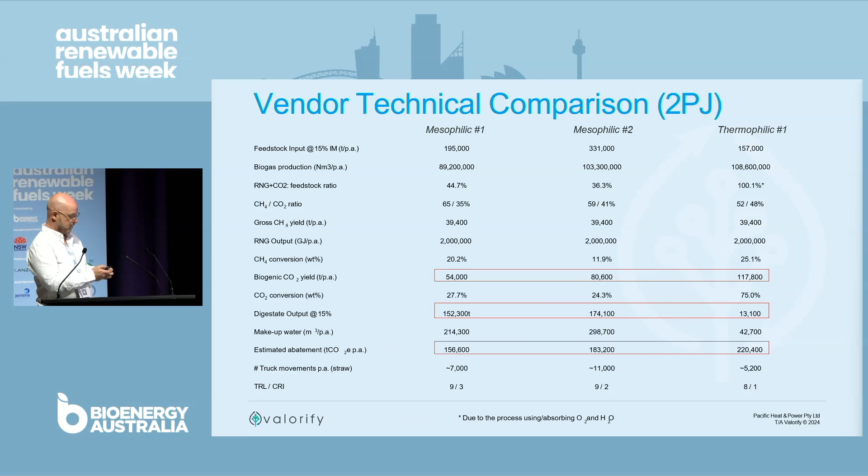So we've gone for yield, and really the focus for us in the thermophilic space, you can see in the digestate numbers, you get a very, very small amount of dry weight equivalent in the digestate stream, and that's because it's a highly efficient process. Almost all of the carbon is being converted into a gas stream, and that makes it really exciting for us. Moving right along, that also means the digestate sales become a really small fraction of the dependency in the revenue stack, and that's an important thing for financiers as well.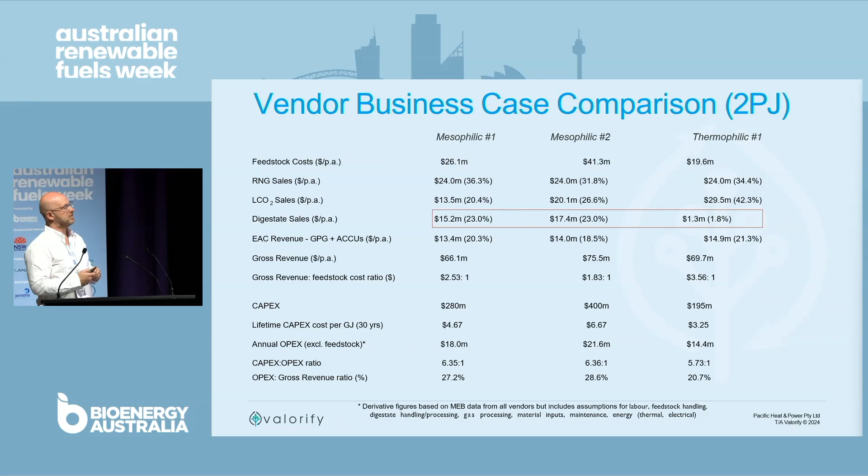Obviously, there's opportunities with biogenic CO2 to look at co-location. We've probably all heard the story about P2X and e-fuels, SAF, diesel, methanol, even synthetic natural gas. It's exciting, but we really need that scalable hydrogen to be available in the market at a competitive price to make that work, and that's still some time away.

Renewable protein is emerging as a really interesting opportunity. 44% of habitable land across the globe is devoted to agriculture. And a large chunk of that is devoted to the support of livestock, so animal feed and livestock production. So a huge proportion of our agricultural sector is there just growing food for animals, basically. So if you can supplant that with protein that is synthesised on the back end of a biogas plant, you can free up huge tracts of agricultural land that's otherwise got to be devoted to that animal husbandry process.

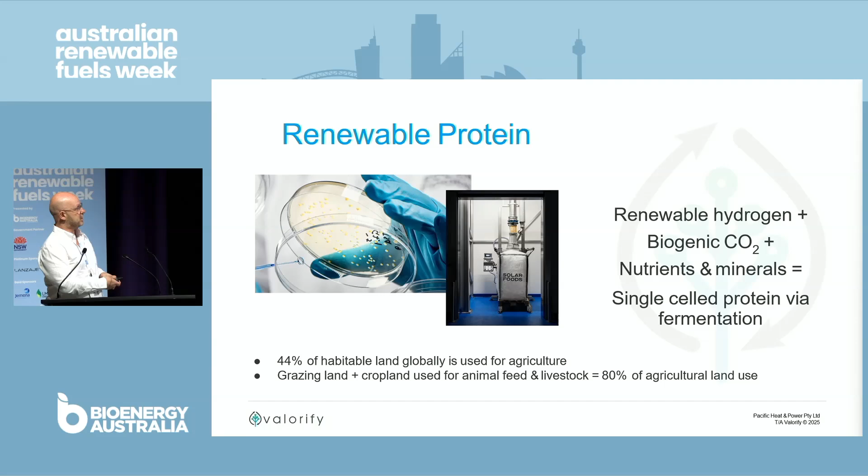Finally, BECCS I think is really interesting. In the European Union, for instance, you can see Ørsted's Avedøre power station in Copenhagen. They are bundling the biogas post-combustion capture with Kalundborg on Western Zealand in Denmark, and then looking to bury 450,000 tonnes a year of biogenic CO2 essentially offshore in the North Sea. So this is happening, it's happening at scale.

And in the absence of hydrogen coming online at affordable prices and large scales, it's the option that's available to essentially, as per the little illustration, stuff the genie back in the bottle. At some point, we've got to find a way to net reduce legacy carbon in the biosphere as well. So I would add, and there's been some allusion to this already, that bioenergy with carbon capture and storage is seen by the IEA as one of the most critical strategies to achieving net zero by 2050, and it is the only methodology we have at our disposal to bury carbon effectively that also generates energy at the same time. So it's the only pathway for that.

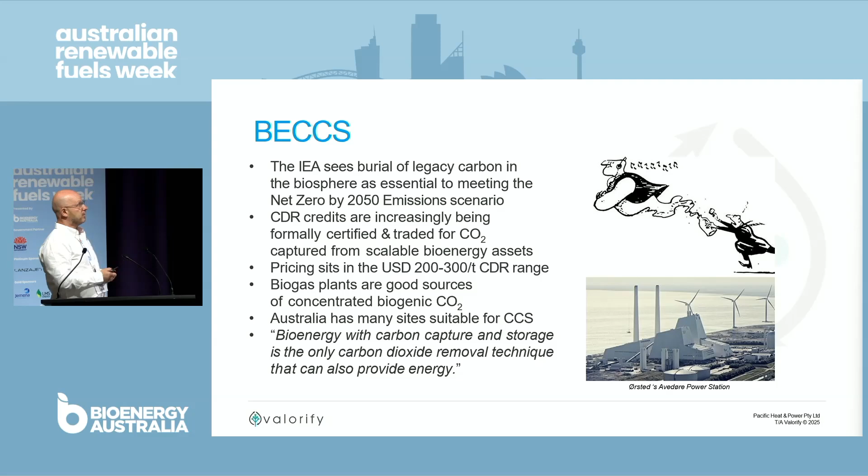So finally, I would summarise by saying that revenue cross-subsidisation and diversification adds resilience to utility-scale biogas plants, and it's really essential to long-term competitiveness. We've got to find ways to monetise the co-products effectively. The environmental benefits are really multiplying when we do that, and that can deliver net negative carbon outcomes, which is great. Renewable hydrogen means that synthetic hydrocarbons are a bit challenging today, but I think that's a much better use of hydrogen than using it neat.

But in the near term, alternate uses of biogenic CO2 are going to be necessary in order to support project economics for projects of the sorts of scales that we're dealing with, by virtue of the volume of CO2 that we're generating. Thank you for your attention.

Afternoon, everyone, or almost afternoon. My name's Dylan Gower, I'm one of the directors of Clean Bioenergy. I'm offering up a small-scale project, regionally based. It's been in development for quite some time. Some of you would have known me going back quite a few years. And also just acknowledging the support of colleagues in the space, and particularly Bioenergy Australia for their work and advocacy in the last couple of years, that really have advanced the conversation.

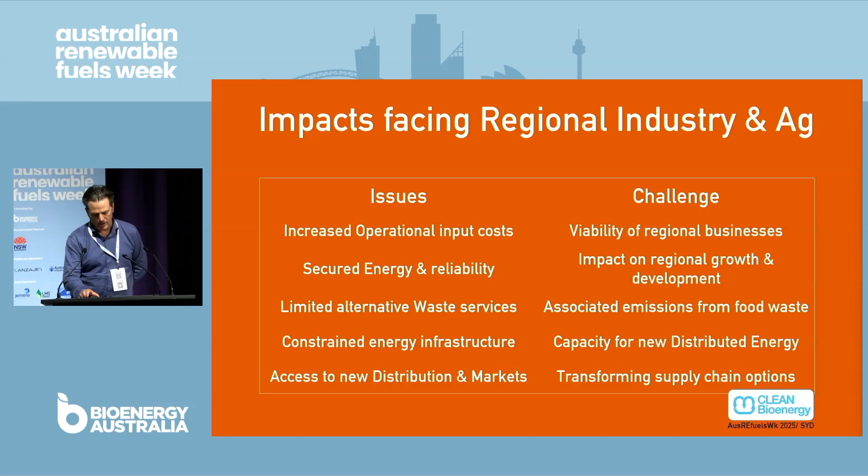We spent the last 6 months interrogating this aspect. We were lucky enough to participate in a grain innovate program put out by the GRDC. As we know, agriculture is facing two significant issues in terms of their production requirements. One, in terms of the amount of waste that's actually produced from the actual undertaking of the process, and then also the reliance and escalating costs in relation to the fossil fuel inputs for production.

As part of this investigation, we're looking at the potential for bioenergy to contribute to this, firstly focusing in the particular area of crop production and the utilisation of residues coming from that process, and then later down the stream in terms of the actual food production once you get to the significant waste streams coming out of that part, and then the subsequent distribution as well.

But I think in terms of the opportunity that we see from bioenergy is how it can potentially address a number of these issues in terms of providing a waste solution, particularly from a regional perspective where a number of waste streams can be aggregated and increase the potential for the utilisation, particularly at a precinct or a district scale. Also the development or utilisation of existing infrastructure for distribution, and I'll go into that in a bit more detail.

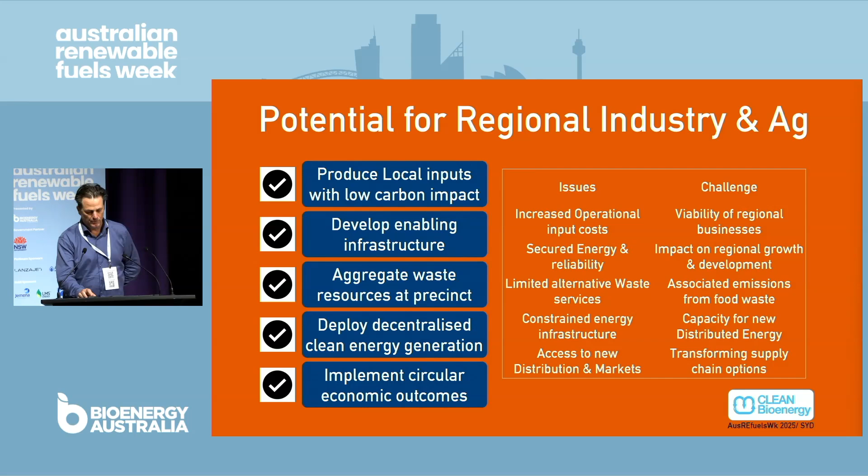But I think most importantly is around producing local products that have a significantly lower impact in terms of their emissions abatement component, and then feeding back into that around the circular opportunity for a number of associated industries.

So what does a large-scale facility look like? In a joint development between Clean Cowra, which is our community organisation, and Clean Core, which is the development wing, we developed a detailed business plan going back a couple of years, established for a major grant submission to the New South Wales Government. We continue to work with our project partners to establish investment into the project delivery. Unfortunately, during the process, as we developers all know, the goalposts got moved a little bit, and the associated grant funding was no longer available.

We're working with our local network distributor, so that's Jemena Gas Networks. Through their encouragement, we look to scale the initial development where we're working predominantly behind the meter, interfacing with a number of key industry parties, mineral processors, food processors, and also metal fabrication that existed within an existing precinct.

And through the development of the business case, we identified that there was a significant opportunity to look for injection into the network, whereby in a unique situation, we could effectively decarbonise the whole of a local network. So any participant in the gas network, whether it was industry, business or residential, was effectively put in a position where we'd offer a significant decarbonisation opportunity. In conjunction with that, we were also developing an embedded network, an electrical distribution network within the precinct, whereby we would be able to utilise any additional gas for electrical generation.

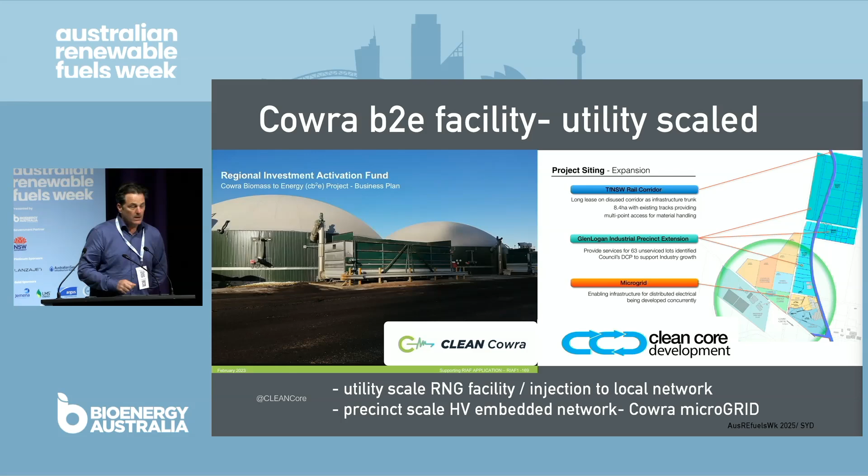So how does it work? I guess the key focus, as has been discussed before, is a shift away from more linear processing, particularly from an agricultural perspective, where with significant inputs, you produce a product and there's a significant amount of waste post-product. I think that occurs in a number of the other associated processing industries as well.

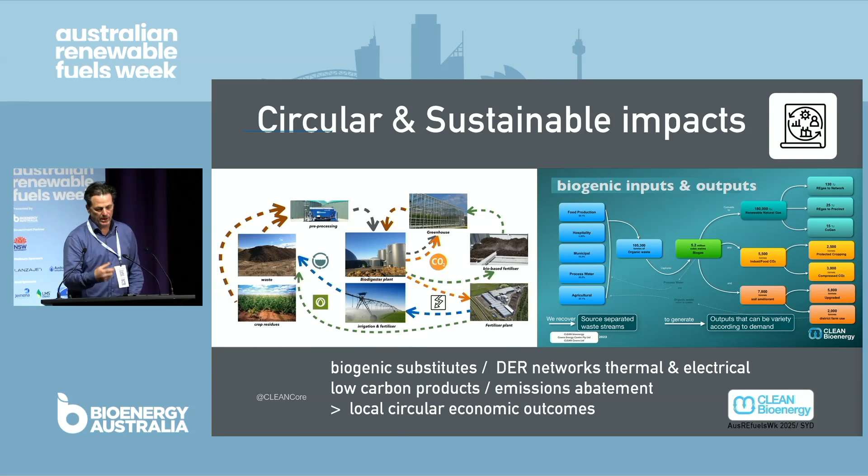Identifying that by providing a centralised approach whereby a number of resources could be aggregated, we can actually turn the dial on that in terms of starting to introduce some circularity, utilising existing thermal networks and creating new network distribution through the likes of embedded networks. I guess effectively decoupling the market, decoupling the valuation from market fluctuations by effectively creating a more circular approach to the project.

So what is the Clean COP project? It's a demonstration. I guess the key focus has been on maintaining momentum for the project development, identifying a need for a live on-ground application for bioenergy within the Central West New South Wales. The initial steps bring a small-scale digester to Cowra, and by doing so we can address some of the key areas of investigation that will help determine some of the environmental, economic and social impacts that relate to bioenergy projects.

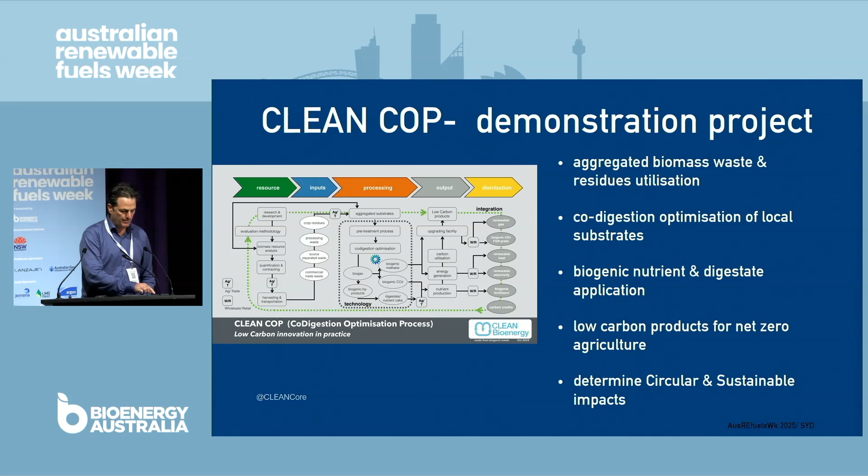So the support that we've been able to attain, as I mentioned before, we participated in the Grain Innovate program, supported by Cicada Innovations, a local incubator program, supported also through the CSIRO. Through that, we sort of interrogated exploring a path to market, particularly of projects of this scale.

During that investigation period, we also identified an opportunity to participate in an innovation challenge that's been put up by one of the regional universities, CSU, through their AgriPark innovation program. This was also supported by Food Agility and RACE for 2030, who you've heard of before. They've developed an opportunity assessment specifically in the bioenergy space, and obviously very supportive of this investigation.

For this particular pilot, we've established a joint venture arrangement with Biogas, a technology provider out of Queensland. And the reason for that was that they've developed a small-scale application for biodigesters, whereby a number of substrates can be put through the process. You take it from a lab-scale application and develop it to a more demonstration-scale opportunity.

I guess it's around the valuation of the input requirements, establishing the opportunity for direct substitutions for agricultural inputs for both fuel and fertilisers as well, and then look at establishing some of the specification and compliance requirements for the nature of the outputs.

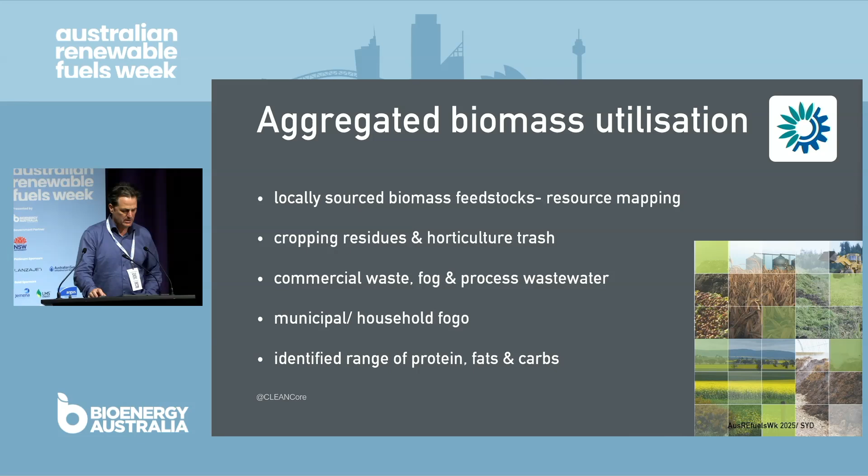I won't harp on the next bits. It's been covered quite heavily during the discussion, but probably the key focus is around that aggregation. So within the Cowra district itself, there's ample biomass in terms of that aggregation. It also offers a variety of waste that then feeds into the opportunity we've raised before around co-digestion, whereby greater yields of gas can occur, and also, as raised by a couple of speakers as well, the nutrient makeup in terms of the digestate post-processing.

Although the throughput of a facility like this is only about 1,000th of the scale of a utility scale, I think it's going to offer some significant data around the optimisation of the gas make, as well as that nutrient stream.

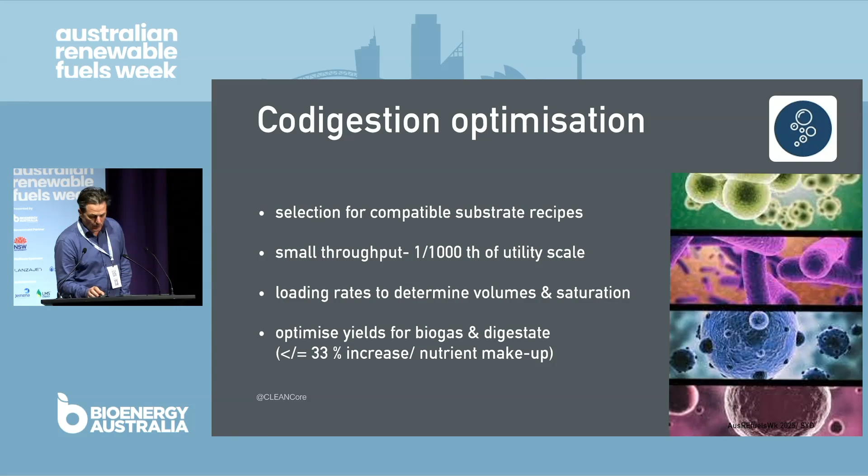I think, as raised before, I think it's Scott who raised as well, the necessity for these projects to have multiple revenue streams is really key. And the deployment of these facilities in order to obtain a path to market needs to address the multiple aspects of this. We see biogenic nutrients as a key component of it. At the moment, in most modelling, digestate is nice to have. It's commonly valued as a sort of high-grade compost value, but we think we can dial that up in terms of some of the exploration, working very closely with a mineral processor around what that may look like as well.

So just very quickly, touching on some of the analysis we did in terms of the potential market scale for this. What that may look like and what are the opportunities that these sort of projects present. This is specifically focused on the potential serviceable market for the organics and inorganic sector, and what fertiliser as an additional revenue stream may look like for projects of this scale.

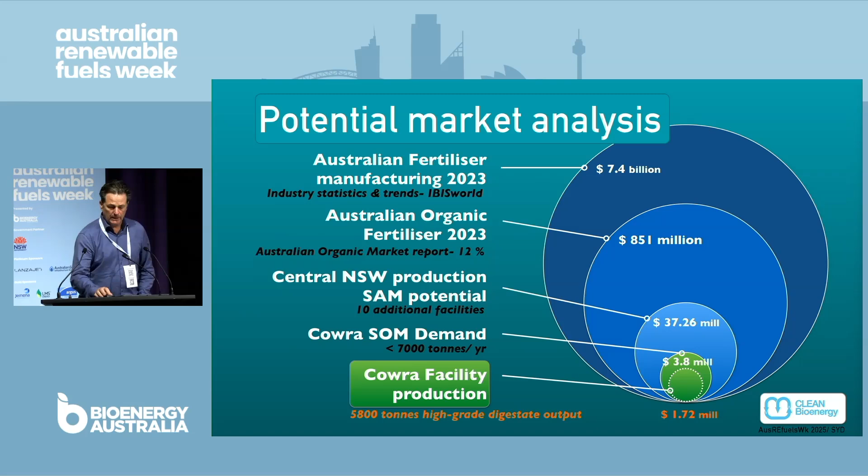So yeah, once again, thank you for this opportunity. It's been a long journey, but as raised before, it requires the collaboration of multiple parties, from government, from industry, and also from the financial sectors to get projects like this. They have very long development pathways, but I think with the collective approach and certainly the momentum that's building now, we can go a long way to actually delivering some of these projects this year. Thank you.

Thank you, everyone. I'd now like to invite the panellists to come and join me on stage for a Q&A.

Minus the Queenslanders, yes.

Thank you all so much for what was an incredibly informative session. I think we learnt so much, including this morning. What we've seen is there is a huge amount of potential supply of feedstock. We are seeing thriving markets overseas in Europe and the US. There are hundreds of plants already in existence, thousands of plants currently under development overseas.

There's obviously proven technology. We've heard about the opportunities to optimise that value. We have also heard that what we need to do to make the Australian market start moving is policy. I'll talk more to that later on this afternoon, but we see that developing as well. But I have a question. We have investors who have opportunities to invest here or overseas. Why would any of those investors invest in Australia right now?